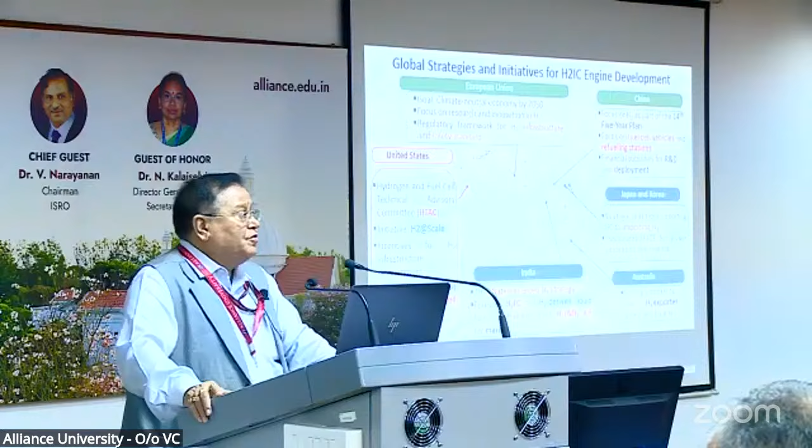Japan and Korea - Japan was the early mover in this area. They set up hydrogen infrastructure for distribution, transportation, and production at a very early stage, making a strategic shift from hydrocarbons, though they were importing hydrogen from elsewhere. Even today South Korea and Japan believe in that, encouraging hydrogen IC engines for power generation and marine applications. Australia depends on producing hydrogen and exporting it - that's the kind of system they have. So each country has followed its own method.

There is a history of hydrogen IC engines - we are not the first. I don't know how many of you know that Tangye Limited produced a town gas-based power generation system for marine, road, or rail applications in 1906. There was no activity between 1970 and 2000, but MAN made the hydrogen IC engine city bus in Berlin - 14 units between 2006 and 2009, with 4 units operated till 2015.

Between 2000 and 2012, there was significant development. BMW did a luxury sedan - BMW hydrogen IC engine, 100 units were manufactured. GM Opel also did that. Japan had fuel cell R&D between 2005 and 2010. Dutch projects were there in this period, and Ford also did work. So there was major work done during these 12 years.

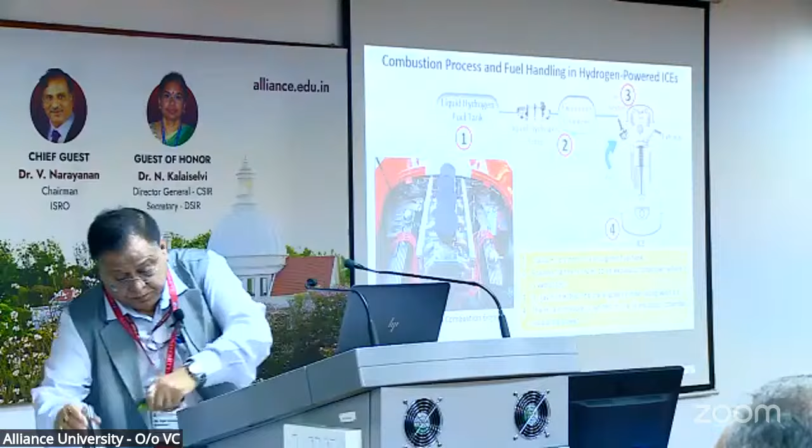The process is simple, all of you know what we're talking about. You can have the option of liquid hydrogen or gaseous hydrogen and directly inject it. Some people use a hydrogen injector with air and port direct injection. In this case, liquid hydrogen is stored in a cryogenic tank, a pump transfers hydrogen to an expansion chamber, hydrogen gas is injected into the engine cylinder along with air, and the hydrogen-air mixture in the combustion chamber does the job - this is a simple explanation.

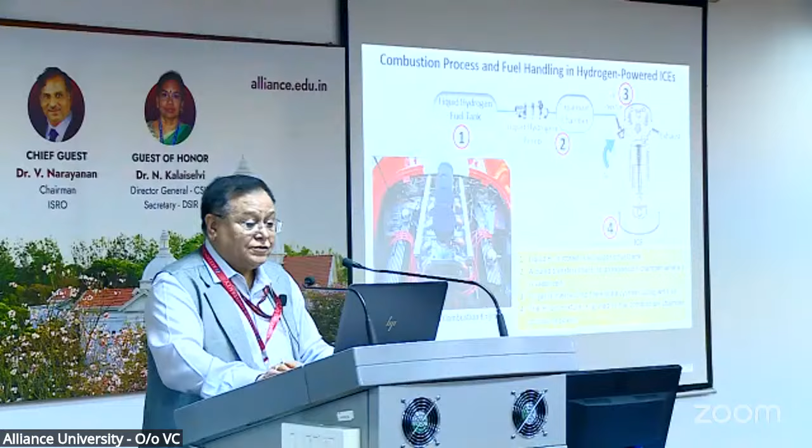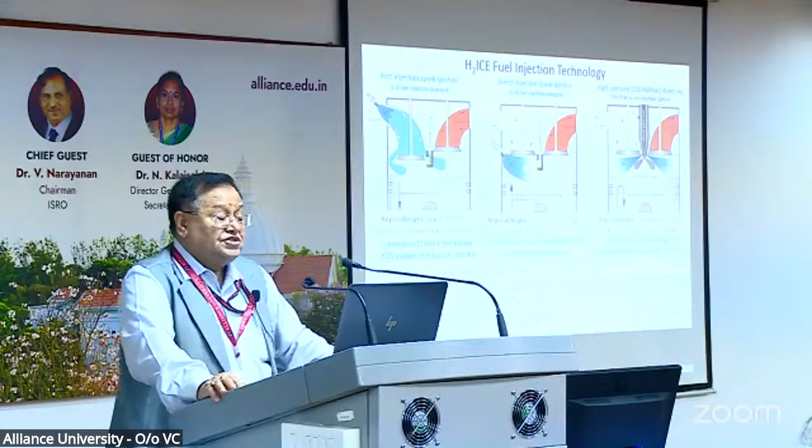Now, I think some experts are sitting here - Ravi is here, Chari is here, many who have worked in this area. There are hydrogen IC engine fuel injection technologies. First among them is port injection spark ignition, at about 3 to 10 bar injection pressure, where at the air intake you inject the hydrogen and use a spark plug. The rest remains the same. Key challenges are power density, abnormal combustion, and efficiency is an issue. This is called Generation 1.

These kinds of systems can come to market as retrofits by 2025. It is the simplest system - these are the plus points, a low cost fuel system. But then there are negatives for this, which is the risk of backfire into the intake manifold, high proneness to pre-ignition, and the transient response in this case is quite poor.

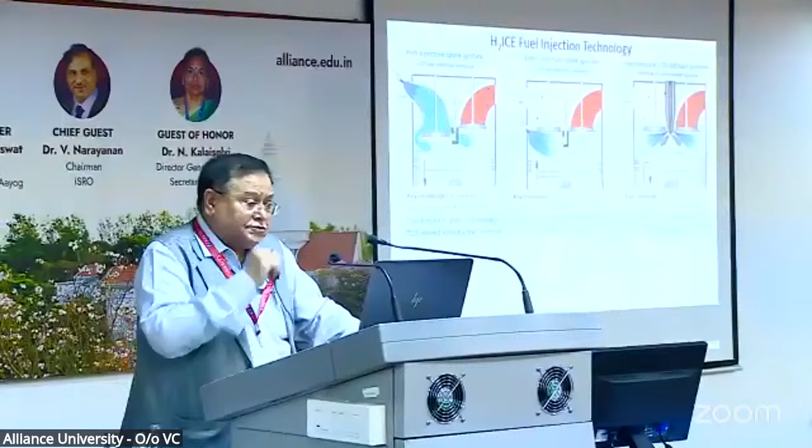The second one is a direct injection spark ignition, done at 10 to 50 bar, where intake is not touched, hydrogen is separately injected, and you use the spark plug. This is called Generation 2, and we expect this will come between 25 to 30. The advantage is that it can provide higher power density, improved efficiency and transient response.

Again, the problem here is an injection system with high durability is required. I am given to understand, I don't know, Ravi can explain to me, whether Bosch or Westport has developed a specific hydrogen injection system now, injectors they have done. Yeah, I think so. Somewhat higher NOx emissions is a problem here.

The high pressure, then the third generation which is coming, Generation 2 plus as we call it, is instead of 10 to 50 bars, you inject at 100 to 600 bar, and pilot fuel or pre-chamber ignition. So that is a kind of explanation. You have air intake, you have exhaust, and you have direct injection with a pilot fuel being done.

High pressure pump is required in this case. NOx is a problem. Fuel compression energy, Generation 2, so best efficiency you can get here. Power density is good, transient response is good, no backfire, reduced pre-ignition. But there is a residual pressure in the empty tank because the entire thing does not get exhausted. There is a lot of work being done to optimize this pressure because I have given you a range between 100 to 600. Obviously, there has to be some optimum pressure at which it should be done.

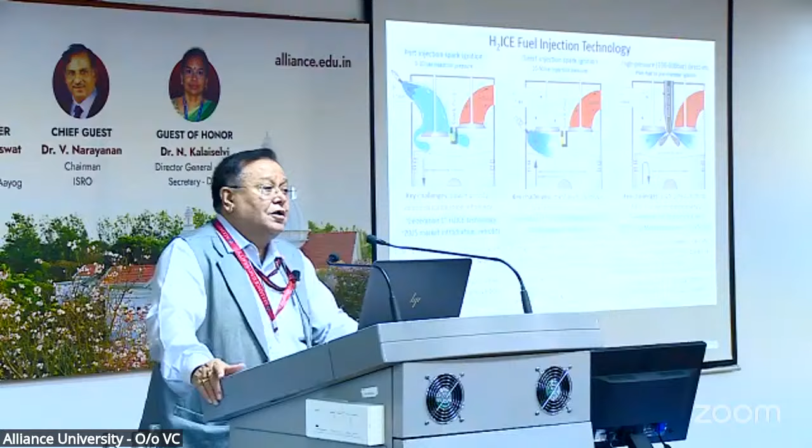So these are the three major efforts, other than the one work which is being done by Ravi on the opposing piston type of configuration, where two pistons are used and no conventional combustion chamber. The piston heads themselves form the combustion chamber in this case. You can have a single crankshaft, you can have a double crankshaft, and inject it at that point in time.

Generally, injection is done at the trailing part of the compression stroke so that you can reduce the NOx formation. The advantage is that it is going to give you much better thermal efficiency compared to the three we have talked about. I don't know whether there is a problem with respect to NOx in that case also, but certainly we have to take care of NOx by running it lean in some other manner.

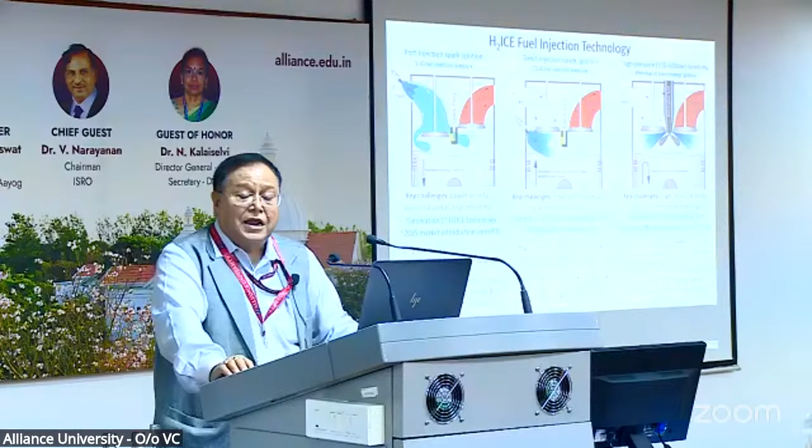So I think India should, as the work is going on in IISc, work on this opposing piston type of thing, and also people should go for direct injection at the earliest. Those industry partners who have already got the spark ignition engines running, I think they can try the port injection with the safety measures which are required for reducing the backfire.

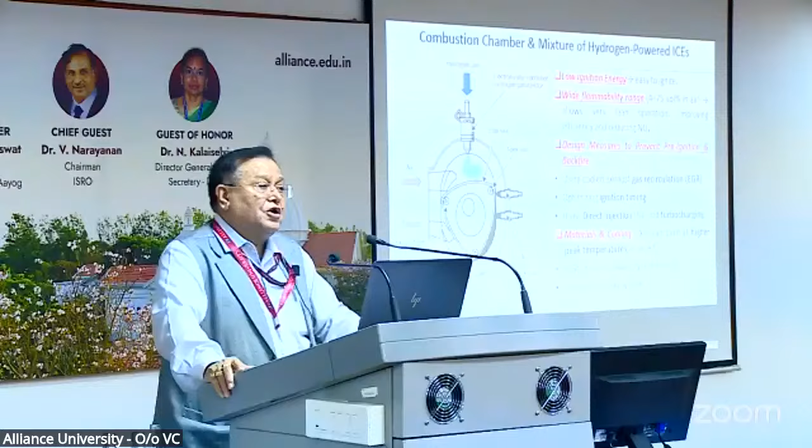Some of the design measures to prevent pre-ignition are using cooled exhaust gas recirculation, EGR. I was discussing with some people yesterday - how many of you have tried EGR as a process for preventing pre-ignition and backfire? We have to optimize the ignition timing because, as I was mentioning, a lot depends upon at what point in time you have injected in the compression stroke and at what point in time you have ignited.

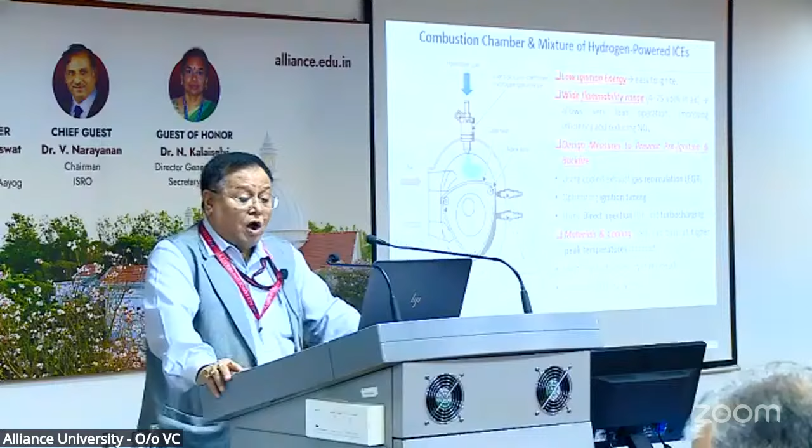You can have direct injection or turbocharging. Because of the high temperature, I think we need heat resistant valves and cylinder heads and also improved cooling systems. These are some of the requirements of the combustion chamber.

So what are the major challenges in hydrogen IC engine? Lean combustion and turbocharging for maximizing the thermal efficiency are the requirements. Chamber design has to be done for better cooling, and gas exchange optimization has to be done. Performance can be improved with the help of two-stage charging and engine scaling, upsizing to meet the power demands.

Fuel storage and supply - as discussed yesterday, fuel storage could be a safety problem, so one has to be very careful in terms of onboard hydrogen leakage detection and sealing. You should have sensors to ensure that there are no accidents.

High pressure hydrogen tank integration is required, because if you are going to use it in gaseous form, the ideal pressure is 350 to 700 bars, and hence you need very important sensing mechanisms and integration, because you can't inject at 700 bars. So you need pressure regulators, check valves, and the entire hydrogen injection system has to be designed accordingly.

One good thing that has happened is that component technology as far as hydrogen handling is concerned has developed worldwide very well now, because of rocketry. The joints, the sealing joints, the weldability, the valves, the regulators - these components are industrially available and certified for use with hydrogen. So that is an advantage for those who are designing hydrogen systems.

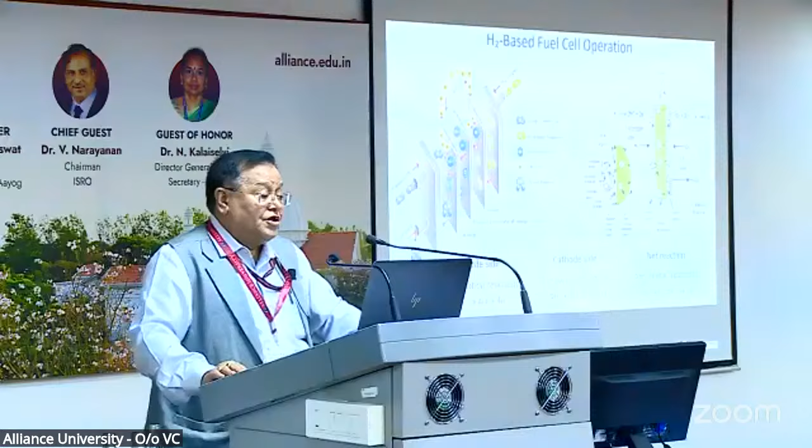This is for the students, how does a fuel cell operate. So you have a typical anode reaction, a cathode reaction, a net reaction between cathode and anode in a fuel cell. Oxygen is put inside, hydrogen is from the other side, and then you get water as an output and you get electricity.

I won't go into details of this. You can read it in your exam, in your classroom.

When you compare fuel cells with gasoline engines and electric motors, there is a clear advantage. The hydrogen fuel cell efficiency is in the region of 50 to 60%. There is a lot of effort being done by the fuel cell community to improve efficiency to as high as 68 to 70%. But only solid oxide fuel cells, which are still in the development stage, are likely to reach this kind of number. For PEM fuel cells, unless they work at high temperature, more than 120 degrees, you will not be able to achieve higher efficiencies. Gasoline engines are at 25-30%, but batteries are highly efficient, 85 to 90%.

Emissions are water vapor, and zero as far as battery is concerned. Refueling time is the most important criteria. For hydrogen, it's 3 to 5 minutes. Gasoline is about 5 minutes, and battery, as you all know, is a minimum of 30 minutes, could be as high as a few hours. Energy density is high and low. Infrastructure: hydrogen needs limited infrastructure. Gasoline, worldwide, we have huge infrastructure in the country, and battery infrastructure is also growing. As I mentioned yesterday, today we have almost 1400 battery charging stations set up across the country. Maintenance is low, only gasoline engines are high.

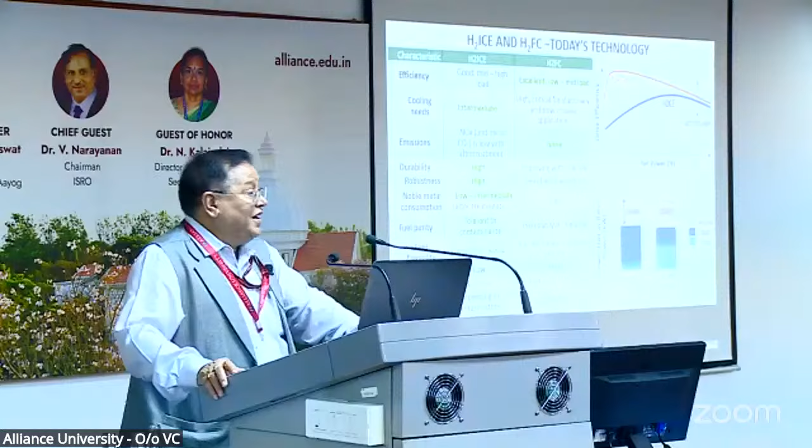Batteries are sensitive to vibration, but not hydrogen IC engines. The use of noble metal is the most important part I have been telling you about - critical minerals and materials in the case of battery and fuel cells is very high, whereas IC engines don't need all that. Fuel purity - IC engines are tolerant to any kind of hydrogen purity, whereas PEM fuel cells, if you have even 5 ppm of carbon monoxide or carbon dioxide, don't work. So you have a major problem. Upfront costs - IC engines are lower, fuel cells are very, very costly even today. Cold start has no issues for IC engines, but there are major problems of starting as far as batteries are concerned. Resale value - we don't know as far as batteries what that will be.

So these are some of the features I thought I should discuss with you and give you.

In terms of storage, there is storage system design and space efficiency. Physically, you can have compressed gas, cold or cryo-compressed, or liquid hydrogen. In terms of materials, as I was talking about yesterday - metal hydrides - you have absorbents like MOF type materials, liquid organic carriers like methylcyclohexane, interstitial hydrides, complex hydrides like sodium aluminum hydride, and chemical hydrogen carriers like ammonia and boron hydride. There's a lot of work going on with hydrides. The major problem, as I mentioned yesterday, is that the energy required for decomposing the hydride to generate hydrogen is generally higher than the energy required for its formation, and that's the reason research still hasn't solved this problem.

For high pressure storage, this is a typical configuration of a high pressure cylinder with an inner liner made of high density polymer, and the rest is carbon fiber composite. The major design problem in this case is the integration of metallic parts like the valves, shown in the blue line, and those things become a major problem.

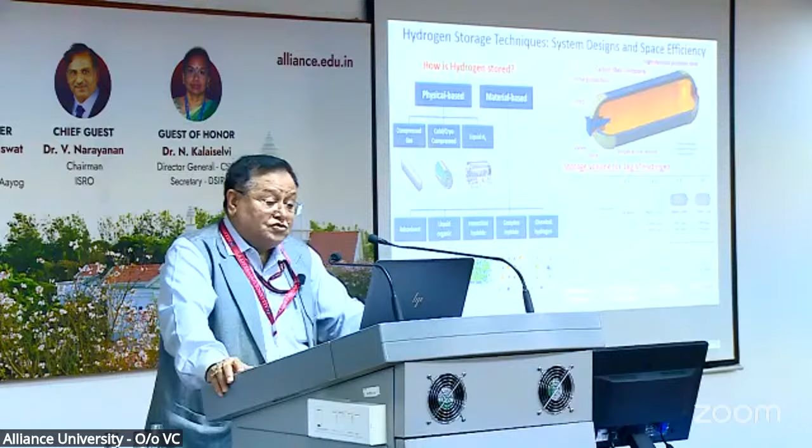You can have different sizes and capacities. If you take atmospheric storage, for the same amount, this is the size. If you take it in the form of ammonia, this is the size. If you take compressed gas, this is the size, and if you liquefy it, this is the size. This is the kind of difference you see when you make choices with respect to storage.

Present status of hydrogen storage infrastructure in India. Somebody asked me this question, I think some press person was asking. Tata Steel became the first Indian company to develop hydrogen transportation pipes, hydrogen compliant API X65 pipes, for 100% pure gaseous hydrogen at 100 bar.

Inox CVA flagged off the largest bulk liquid hydrogen storage tank ever made in India, with a capacity of 238 meter cube. Design has been done by South Korea. The cryogenic storage tank is built to European Union standards and requirements.

IITs and NITs are advancing metal hydride systems for efficient and safe hydrogen storage. For example, AB5 lanthanum, cerium and nickel, and AB2 titanium, zirconium and chromium alloys are being thought of.

There's a company called Vedasya - I think there are a lot of advertisements nowadays on TV for this company. They design and produce type 3 and type 4 composite overwrapped cylinders. So we don't have a problem. People should not think that India is not manufacturing the 700 bar cylinder. It is possible, but we need to set up the testing facility and infrastructure, and also PESO has to set the standards as far as regulations are concerned. Otherwise, such a high pressure system cannot be let out in the market without proper regulatory mechanisms.

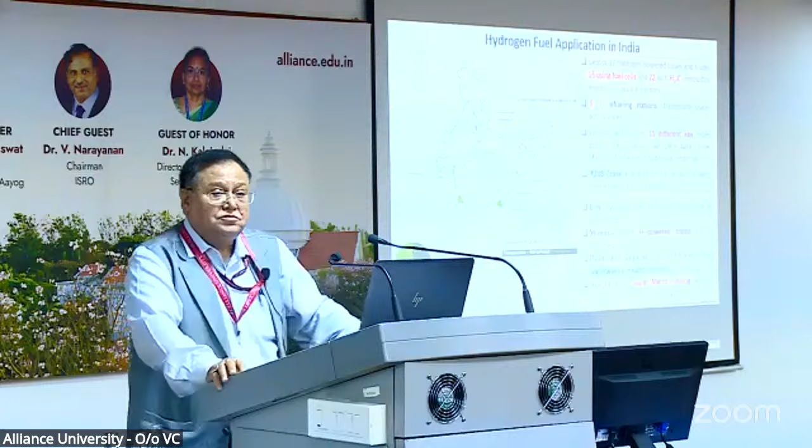Hydrogen fuel application in India - this is with respect to the National Hydrogen Mission. Deployed 37 hydrogen powered buses and trucks, 15 using fuel cells and 22 using hydrogen combustion.

9 hydrogen refueling stations have been placed. Vehicles will run on 10 different key routes like Delhi, Agra, Pune, Mumbai, Ahmedabad, Vadodara. 208 crore allocated for these pilot projects.

Somebody was mentioning yesterday that in Leh, we have hydrogen fuel cell buses operational at 11,500 feet. India's first hydrogen powered train is to be launched in 2026.

My friend Mahesh Rajpurohit is a railwayman. It is one opportunity where we can really remove all diesel engines and put hydrogen engines for running the railway system. Delhi, Gujarat and Kerala, they are all working in that direction.

The scaling of hydrogen mobility comes with a few challenges. One of the main problems is the infrastructure. As I mentioned, when Japan was introducing hydrogen, being a small country, it was not difficult for them to set up charging stations and things like that. We are trialing 9 hydrogen stations, trailing behind Japan, which has 166, and Germany with 105. But it requires a lot of investment.

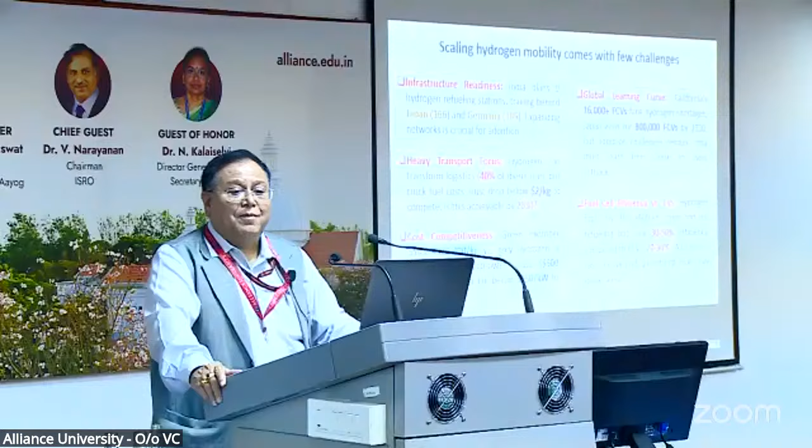Heavy transport focus - 40% of diesel buses can be replaced, but truck fuel costs must drop below, hydrogen should come to below $2 per kg to compete. Is this achievable by 2030? That is one of the major problems. If you are not depending upon green hydrogen for IC engine applications, then I think this is achievable. But if you are only saying you'll use only green hydrogen, then you have a serious problem with respect to timelines. Cost competitiveness, this number we discussed a number of times.

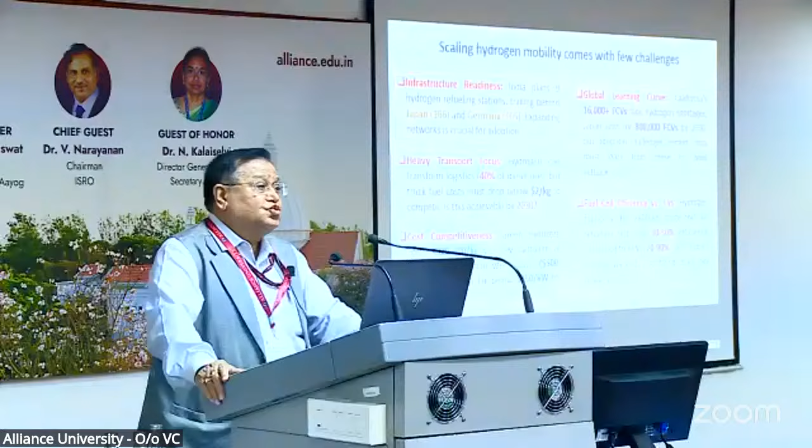Green hydrogen in terms of rupees is anything between 320 to 400 rupees a kg. Grey is 120 to 160 rupees a kg. Electrolyzers, I mentioned, anything between $500 to $1,200 per kilowatt. This has to come down to less than $250 per kilowatt for viability. There's a global learning curve.

California's 16,000 plus FCVs face hydrogen shortages, and Japan aims for 800,000 FCVs by 2030. But adoption challenges remain. India has to learn from these to avoid the setbacks. This is the major thing.

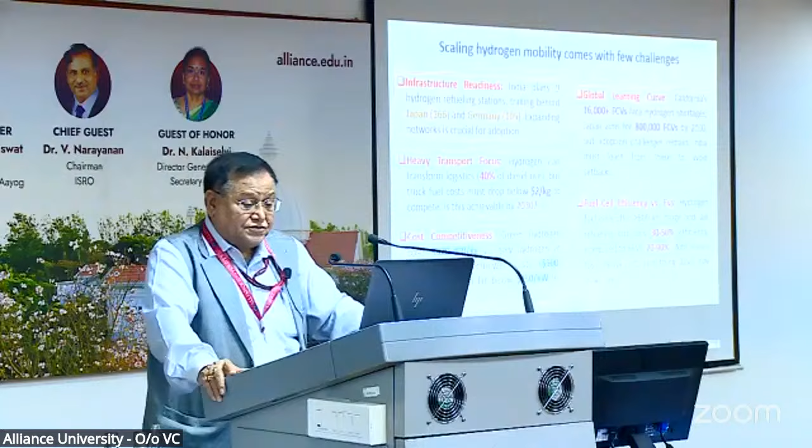Fuel cell efficiency, I mentioned to you - hydrogen fuel cells offer greater than 600 kilometer range and fast refueling, but with an efficiency of 30 to 50% compared to battery electric vehicles, which give you as high as 90% efficiency.

Integrate hydrogen fuel into power systems - that is, hydrogen as a long duration energy storage for balancing renewable power supply, especially in isolated grids or remote regions. Enable hydrogen-ready gas turbines and fuel cells to generate electricity during peak demand or renewable intermittency. In fact, hydrogen used in gas turbines also has to be looked at.

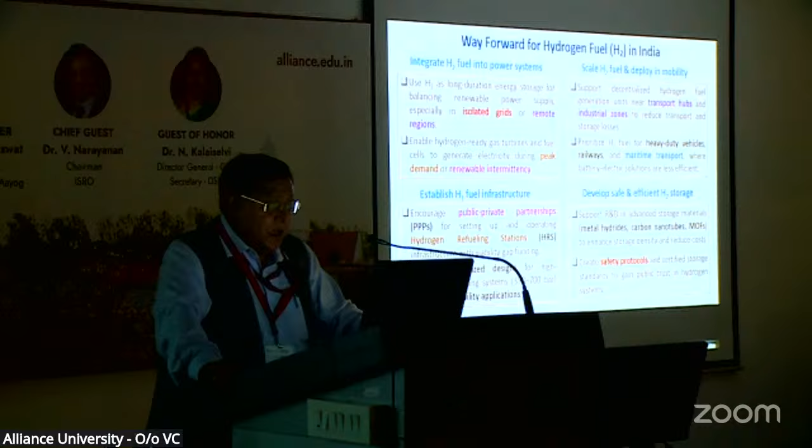Establish hydrogen fuel infrastructure - that is, encourage public-private partnership for setting up and operating hydrogen refueling stations, and create standard designs for high-pressure dispensing systems, because you have to compress on site. You can't be transporting 700 bars.

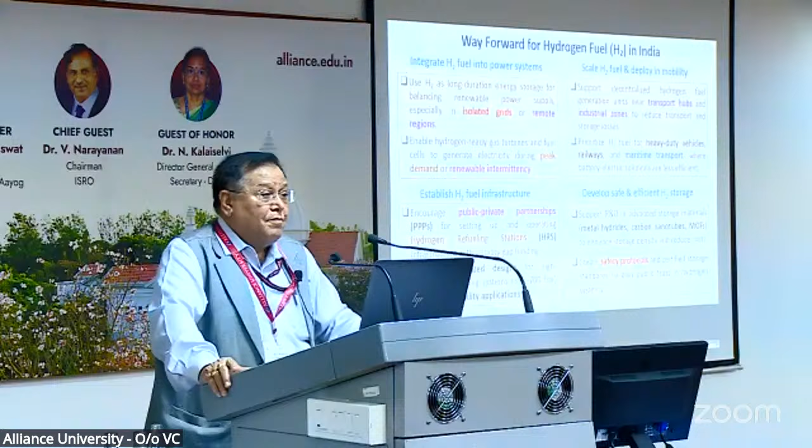You can't run heavy duty vehicles on batteries easily, so railways and heavy duty vehicles are ideal for hydrogen. Safety is very important, so for efficient hydrogen storage, support R&D in advanced storage materials like metal hydrides, carbon nanotubes and metal-organic frameworks, as I mentioned yesterday. Create safety protocols and certified storage standards to gain public trust in hydrogen.

So to conclude, what is the future outlook? Near-term decarbonization is feasible. Hydrogen IC engines are ideal for hard-to-electrify sectors like heavy trucks, rail and marine. Infrastructure compatibility leverages existing fueling stations and engine platforms. It is possible with lower development costs - we have seen the three different configurations I have given, not much cost. Faster market adoption, since familiar technology increases acceptance among OEMs and fleet operators.

If I tell any of the IC engine companies today, like Kirloskar, Ashok Leyland, Caterpillar or others, I think they will have no difficulty adopting hydrogen IC engines. Even the diesel generator sets running today, or those on the SI cycle, can all be readily converted into hydrogen gensets. So a smooth transition is possible.

Then comes fuel flexibility - you can operate on blends using transition fuels, like hydrogen and natural gas as I mentioned. There has to be a key R&D focus for this community. I think it is important to improve direct hydrogen injection systems - a lot of work is required in that area. Optimize the pressure of injection, valve timings and so on, and reduce NOx emissions without compromising efficiency. We can go leaner and leaner, but you still have an efficiency problem.

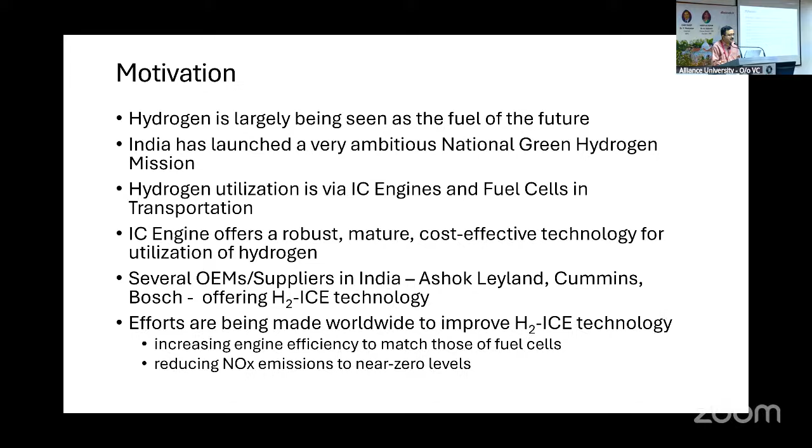I'm going to skip some of the initial slides, since this has been covered extensively yesterday and today. Dr. Saraswat gave a very long and detailed talk about the hydrogen scenario in India, which was very inspiring for many of us. So I'll skip the slides on hydrogen as an IC engine fuel, and some of the challenges in IC engines that were also spoken about yesterday by people from industry and academia.

So pre-ignition being a problem, crankcase ventilation. But I want to highlight this point, which I think Dr. Saraswat also made, about lean combustion with higher compression ratios giving you the best efficiency. This is something I'll talk a little bit more about, along with the associated problems with that. Again, I'm going to skip some of this in the interest of time.

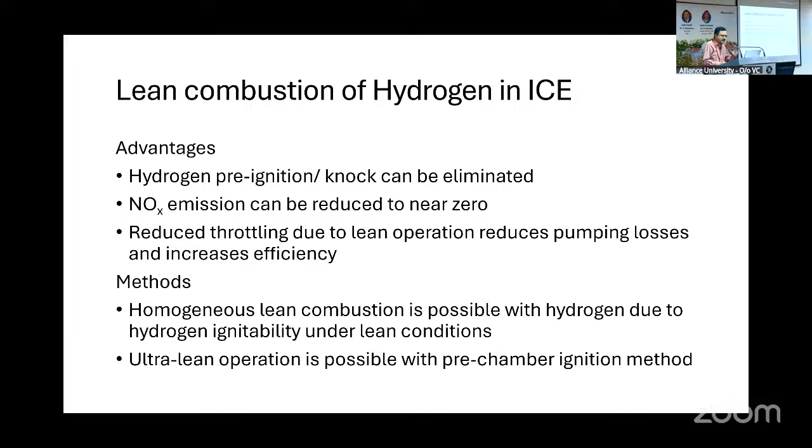Lean combustion has a lot of advantages. You can eliminate pre-ignition or knock. The problem of high NOx emissions that Dr. Saraswat mentioned can be mitigated to a large extent. From an engine point of view, you can do reduced throttling because it reduces pumping losses. There are quite a few technologies available for getting to lean combustion. I'm going to focus on one such technology, and in the second half of my talk, I'll discuss what we've been doing on the opposed piston engine. This is the broad outline of today's presentation.

Now, pre-chamber combustion is something very interesting. Many of you who have been traditional IC engine students know that pre-chambers were used in old diesel engines, indirect injection diesel engines.

This pre-chamber concept is coming back in a big way for hydrogen combustion, and I'll tell you why. There are two broad kinds of pre-chambers, active and passive, and it basically allows you to have stratified combustion in addition to homogeneous combustion.

Pre-chamber combustion is being applied to not just hydrogen, but multiple fuels like gasoline, CNG, ethanol, and so on. It allows lean combustion, which improves thermal efficiency, and lambda values as lean as 5 are achievable. When I say lambda of 5, that means the equivalence ratio is as low as around 0.2, extremely lean or ultra lean. That is also possible with pre-chamber combustion.

So here is a deep dive into what is pre-chamber combustion. Essentially, you have a small chamber into which you either actively inject fuel and allow some combustion to happen, and those hot combustion gases then come out into the main chamber. So you can have a very lean mixture in the main chamber, and this rich combustion in the pre-chamber, and the turbulent jets which are burning and entering the main chamber allow it to ignite. Essentially, that's what it is.

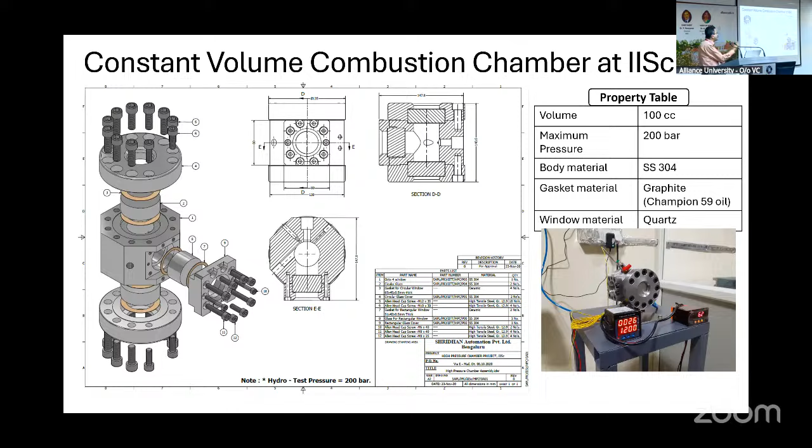Here we have been trying a lot of research on ignition systems. The time is very limited, so I'm only going to give you a flavor. We have been looking at thermal plasma ignition systems and also non-thermal plasma, which is very interesting. I won't be talking about non-thermal plasma in this talk since it would require a lot more time, but these nanosecond pulse discharges have also given us some very encouraging results.

This is like basically high-speed shadowgraphy, as we call it. This is just a picture of the setup. You can see the constant volume chamber here, the high-speed camera, and all the optics for the backlighting. I'm going to show you some sample results in a minute.

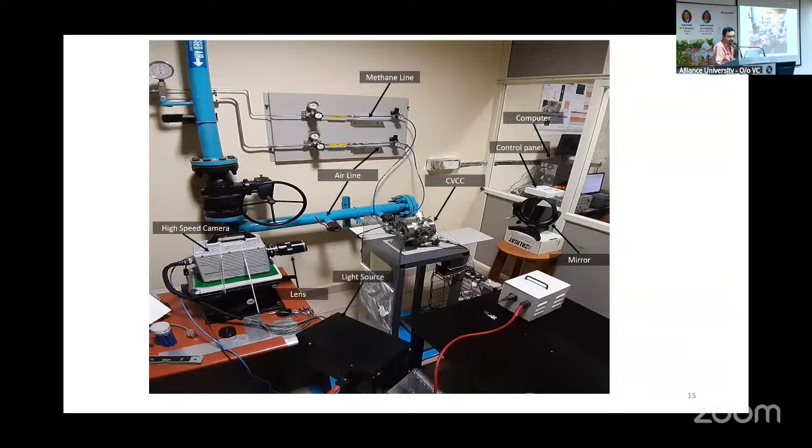What I'm trying to say is that these kinds of experiments give us a lot of insight into how the flame is actually going to behave inside the combustion chamber. Of course, there's a disclaimer: this is a nice laminar flame, whereas in a real IC engine you have a highly turbulent mixture which tends to accelerate. But this still gives you a very good idea of what to expect when you bring in hydrogen as an IC engine fuel.

Now, I was talking about pre-chambers. A passive pre-chamber is when the mixture inside the chamber goes back during compression, the same mixture ignites, and then comes out as a burning jet. This is an active chamber where you're actually injecting some fuel into the pre-chamber, so you have a rich mixture which burns and then the jets come out. I'll show you a video of this very shortly.

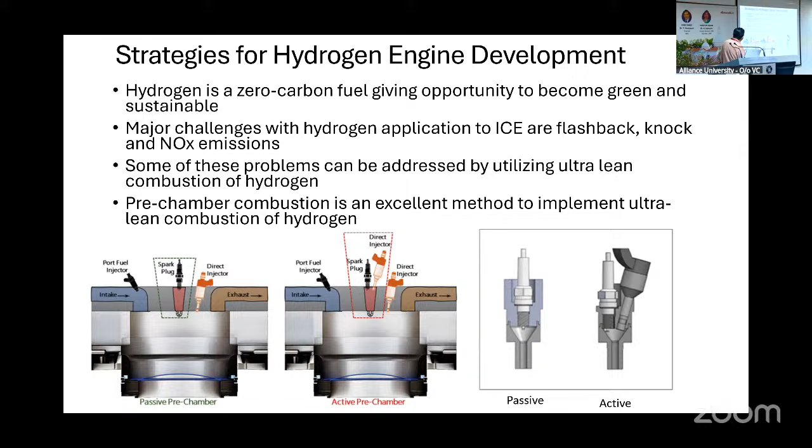We have been looking at this pre-chamber technology very actively, both from a fundamental constant volume chamber point of view and also in the IC engine. I'll skip the details, but we have started to look at hydrogen methane blends. We believe that pre-chamber is an excellent method to implement ultra lean combustion of hydrogen. Of course, there will be issues like NOx, I'll talk about that a little later.

This of course is with methane, but with hydrogen you expect maybe something very different. We have not yet done experiments, in fact some of the experiments with hydrogen are ongoing as we speak. But you can get a lot of data from this. We have looked at different kinds of spark plugs, we are looking at passive pre-chambers, just to give you a flavor of what we are doing.

We have created a small engine test facility at IISc. Of course, this took a lot of effort, funds and resources, but I'll just show you a glimpse. This is a completely remotely operated test cell. We have the engine and the dynamometer inside, and the operators actually sit in a different building, so in terms of safety we have ensured that this is implemented.

Inside we have a lot of other features. For example, we have all hydrogen rated pipelines. Dr. Saraswat was talking about some of the standards of hydrogen, so we have implemented all of those. There's automatic shutoff, so if it detects hydrogen leakage, there's an automatic shutoff of all the valves from the hydrogen bay. There is active fire suppression, so if a sensor detects hydrogen, it immediately injects a gas called HFC, one of the HFC gases, to suppress fire. So this facility is now rated for hydrogen, 100% hydrogen engine tests.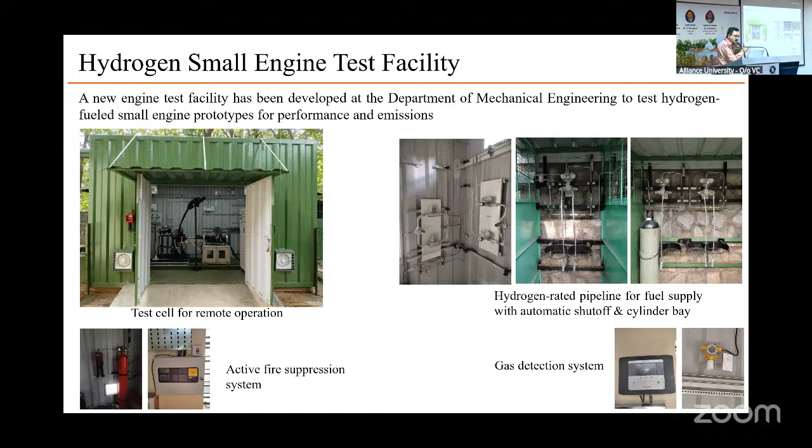We have an office of laboratory safety on campus, and unless they come and certify, we are not allowed to do experiments. So this office has actually certified this facility for hydrogen usage for small engines.

I have about 7 or 8 minutes left, so I'm going to quickly talk about the opposed piston engine, about which Dr. Saraswat also made a mention.

I borrowed a slide from this startup called Achates Power. This is a very successful startup in the US. They've been around for 20 years. They've built this opposed piston engine. You can see that these two pistons are moving against each other.

It's a two-stroke concept. You can see the ports where the fresh gases come in and the exhaust goes out, and the two pistons are moving against each other. So there's no question of a cylinder head, and there are no exhaust or intake valves. So the mechanical complexity comes down, and they have actually built a diesel engine with this technology.

In this case, you can see it's a 3-cylinder engine. One of the diesel engines that Achates has developed has actually been measured, and it is now powering a truck in the US, delivering 50% brake thermal efficiency. Now, all of you know that 50% is unimaginably high for an IC engine.

If you remember the plot Dr. Saraswat showed about how fuel cell efficiencies come down with power while IC engine efficiencies increase, and both of them are meeting somewhere—remember that plot about fuel cell versus IC engine efficiency, how they are meeting—this technology promises to bridge that gap.

Of course, this 50% is with diesel. There's a lot of research going on around the world on hydrogen opposed piston engines. And if you really get 50% with hydrogen, that's a jackpot, because then it can easily beat a fuel cell. So I'm going to skip some slides.

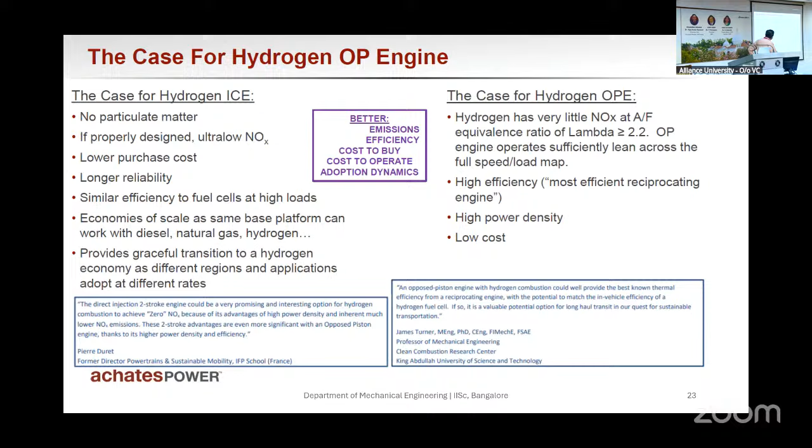Regarding the design development of this engine at IISc, conceptually it's a simple 2-stroke engine with uniflow scavenging—meaning fresh charge comes in and goes out from the other side. We did a lot of CFD work to optimize the scavenging port design. In the interest of time, I'm going to skip all of this. We optimized the port angles and port areas—this may not be of much interest.

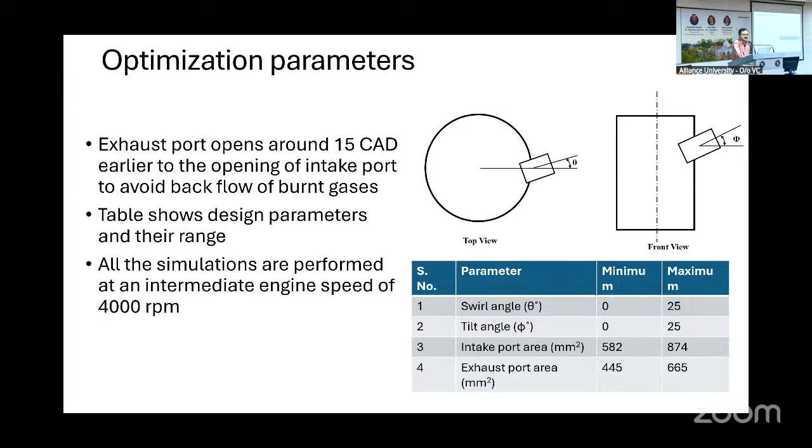I'll just show you a sample. We did a lot of optimization and came up with a lot of different angles. Essentially, everything was based on very elaborate CFD simulations. We used the DOE approach, so there were literally more than 50 to 60 simulations done.

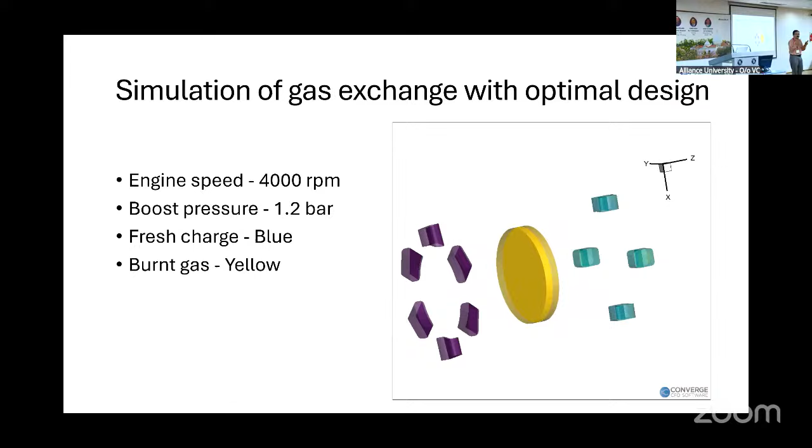Now, if you remember from Dr. Saraswat's talk, he mentioned NOx being a big challenge. In 2-stroke engines, the beauty is you can manipulate your scavenging process to ensure there's some leftover gas from the previous cycle—it's like internal EGR. I think all of you know what EGR is, exhaust gas recirculation. In a 4-stroke engine, you have to purposely bring exhaust gas back into the cylinder.

In a 2-stroke engine, you don't have to do anything extra. You just manipulate your port in such a way that some of the gas stays inside from the previous cycle. So it's automatically doing EGR for you, which lowers temperatures and lowers NOx. That is the beauty of the 2-stroke concept for hydrogen engines.

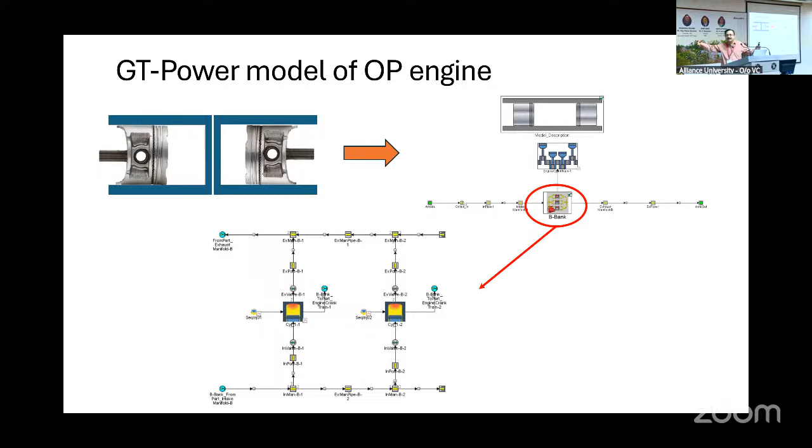We have built a lot of CFD models and also engine models using a software called GT Power, which enables you to build an entire engine model. This kind of model helps us optimize the stroke to bore ratio, which is very important for many things. We have done all these simulations and arrived at the design.

The conceptual design is basically meant to speed up our development. We have borrowed commercially available 2-wheeler engine parts, including pistons and other components, and we are trying to build a prototype using some of these commercially available parts.

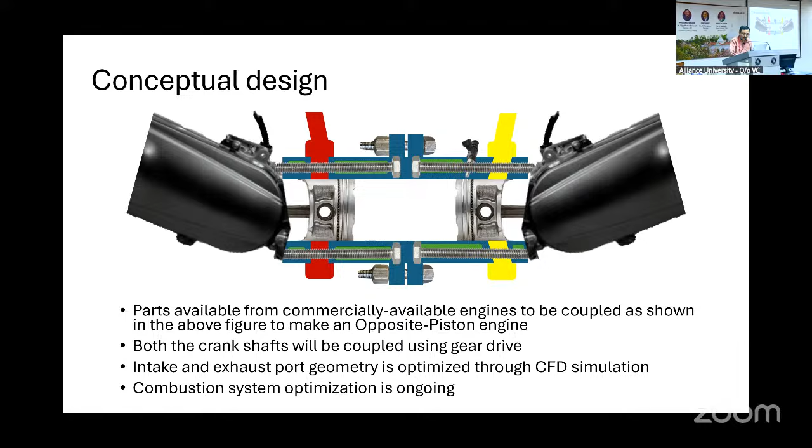Some of the work is still ongoing, like combustion system process optimization. We are planning to use low pressure hydrogen fuel injectors for this, specifically port fuel injectors. They aren't shown clearly in this diagram, but the fuel injector is shown right here. We use low pressure injectors to inject hydrogen fuel into the cylinder.

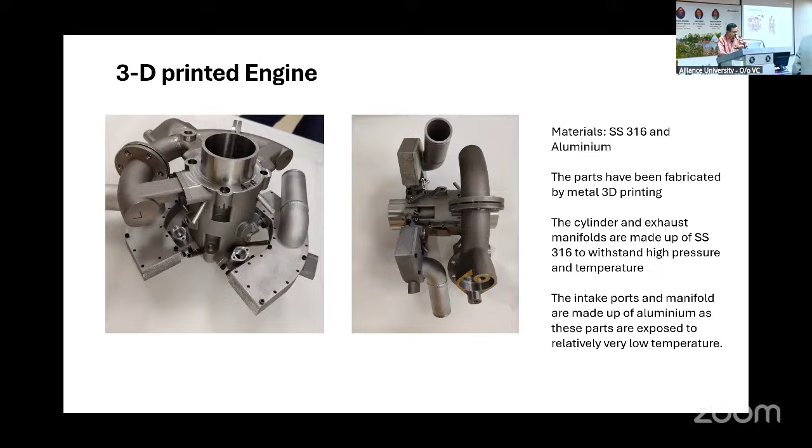I think I'm exactly in time, 11:20, so I will stop here. Thank you very much. I don't know if there is time for questions, but if there is, we can take one. Thank you.

What is this GT Power model? GT Power is basically an engine simulation software where you can model the entire engine. The cylinder is basically modeled as 0D. It is designed particularly for IC engines, not gas turbines. The cylinder is modeled as 0D and the manifolds are 1D intake, so it's a combination of 0D and 1D. That's why it can run very quickly - the simulation can be run very quickly.

Yeah, okay, yeah, thank you. Thank you all.

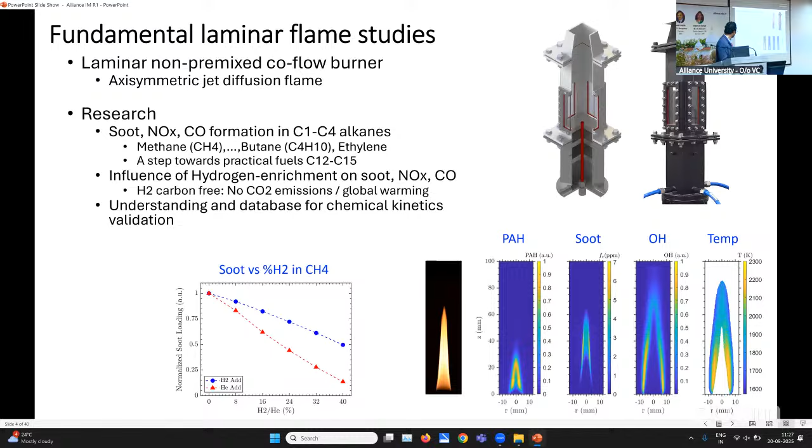We also look at not only laminar flames but turbulent flames. This is a rich quench-lean gas turbine combustor, one sector of the combustor, and the typical flame looks like that — a very sooty flame with ethylene fuel. There are other holes for the second stage of combustion, so you do rich combustion here and lean combustion there. This transition is for low NOx, but the rich case will generate soot, and when you put on the dilution air, that soot gets oxidized. On the left side you see soot concentration information in ppb.

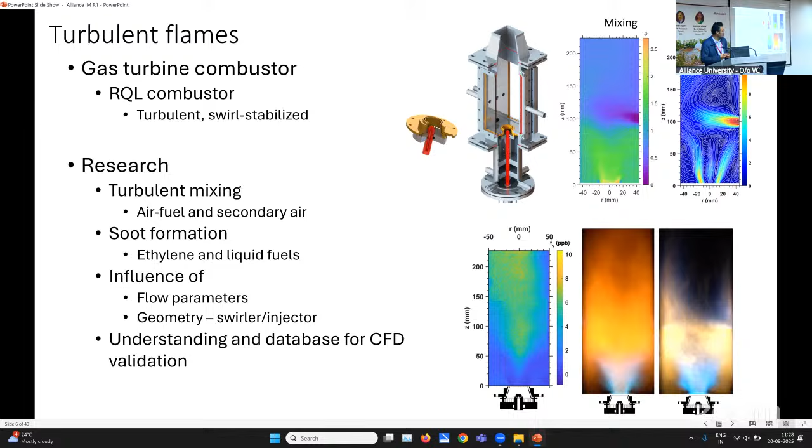We also looked at cold flow air-fuel mixing. This axis represents equivalence ratio or fuel concentration, so you have a rich mixture here, then injection of pure air, mixing occurs, and you get a lean mixture - that's the transition. On the right you see a velocity field obtained using a technique called particle image velocimetry. That's an example of these capabilities.

Now why soot emissions are not good: the previous talks spoke of particulate emission and NOx emission. Not only for IC engines, but for aircraft engines, soot emissions at particular altitude act as crystallization sites, leading to formation of contrails that you can see in the sky. These are condensation sites and formation of crystals, liquid and then ice crystals, due to colder ambience, and this mainly traps heat with H2O. This leads to global warming, so that's why these emissions are controlled. If you want to sell your engine, it needs to be under certain emission control.

That is for a jet engine, and the fuel you use is C12 to C15, a carbon chain typically with alkanes and to some extent aromatics. This is a very complicated fuel to handle, and academically we are somewhere over here — we know the chemistry of C2H4 ethylene very well, and maybe these other fuels are getting developed, but we are a bit far from understanding chemistry for that part. So our approach is to start with very simple fuel, generate flames, provide the database, and hope that eventually we'll bridge that gap as well.

So in chemical kinetics, hydrogen-oxygen chemistry is very easy because the set of reactions is small. The next level is CO chemistry, again with a small set of reactions, then methane chemistry, and the carbon number progressively increases. So chemistry for higher hydrocarbons builds on the simple chemistry of H2-O2 and CO and so on.

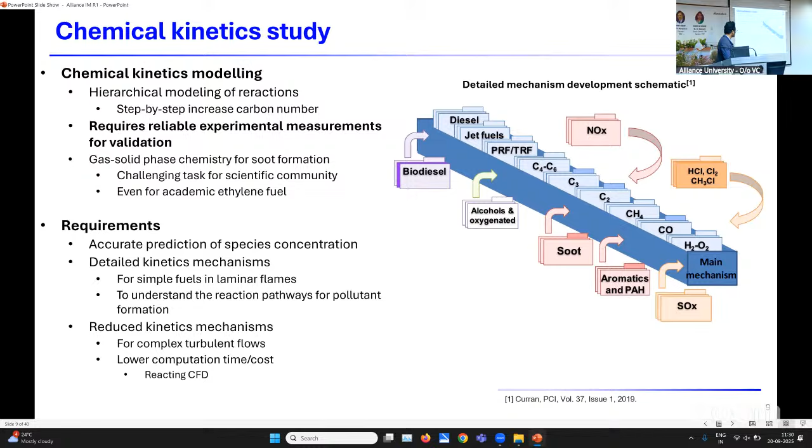So that's a laminar flame, burner stabilized over here. That's a one-dimensional flame, easier to simulate, and you see soot forming. There's a flame somewhere here, and the top plate stabilizes the flame. You see soot forming over there, and this luminosity you see, just like an electric bulb, is incandescence coming from the soot.

Now along this side, what's happening is you have pyrolysis of the incoming fuel-rich mixture, formation of polycyclic aromatic rings, and eventually that aromatic size grows and you have inception of the first soot particle. The particle also grows along this direction, and the growth can be described by the C-to-H ratio of that particle. So the incipient particle will have less carbon and more hydrogen, and eventually carbon starts to dominate, and it can go to pure carbon.

So that's the whole idea over here, and we do 1D flames and take measurements. Now that's the burner details. The burner looks like that.

In the measurement technique, we put a laser sheet of 1064 nanometer infrared wavelength, and since this is a black particle, it absorbs that radiation and gets heated up beyond the flame temperature. So it has its own incandescence beyond this natural luminosity, and you get a signal out of that. That signal is proportional to soot volume fraction. That's the entire principle of the measurement.

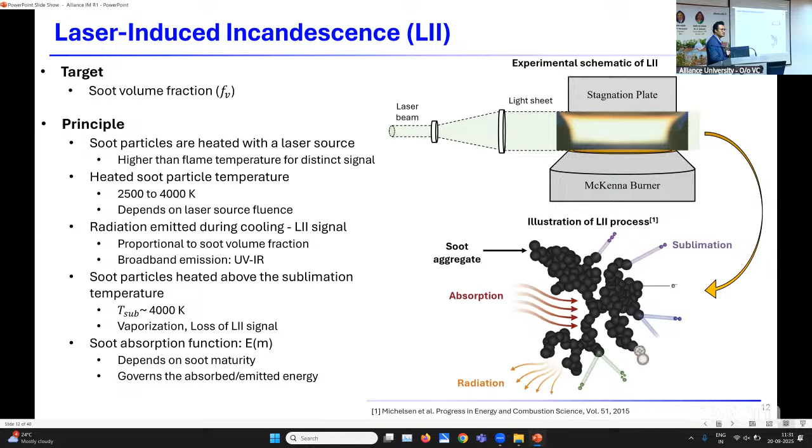This curve shows the incandescence signal as a function of laser energy. You suddenly start to have a signal coming from soot radiation, soot incandescence, and then suddenly you have a plateau. This plateau occurs because the soot particles sublimate due to absorption of too much energy as a function of laser energy. That's a typical trend, and people do experiments around that point so there is no sensitivity to laser energy variation.

So you need to calibrate that signal. The way you calibrate is basically similar to how you don't see well when there's fog or rain, because light gets absorbed or scattered. The same principle applies here. If you pass a laser beam through the soot, you'll have less intensity due to absorption or scattering by these particles. By looking at a certain constant, you can get the soot concentration. That's how we calibrate our signal.

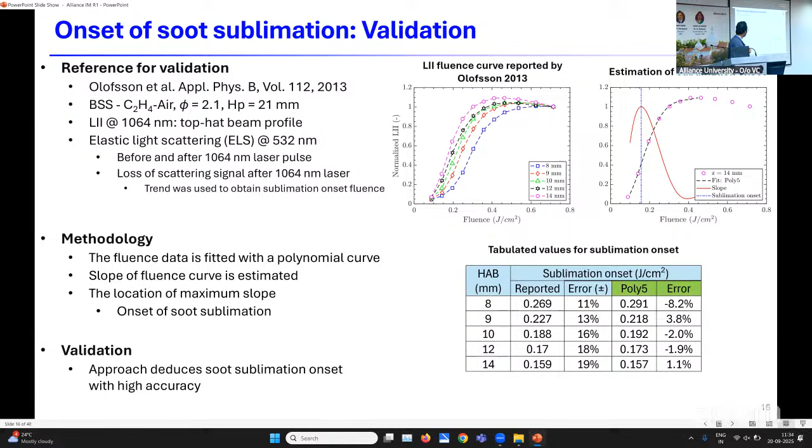That's our approach. By doing that, we come up with this curve. We say that the absorption optical property of soot changes in this manner, the bottom curve, and the top curve shows the temperature variation along the height of that particular burner.

This curve signifies the importance of doing that correction. The first line is uncorrected, the dotted line is corrected. If you don't correct, you have a slight error and the bias is very high. For example, at a particular height, say 6 mm above the burner, the bias could be about 100%. So this is the kind of accurate result you can get.

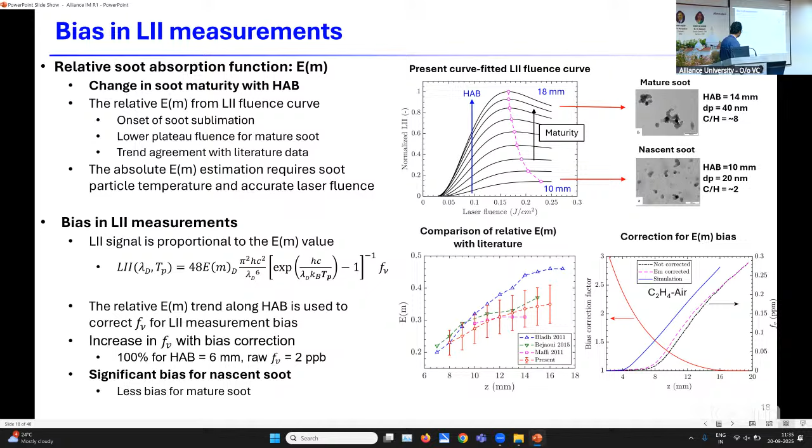This picture shows, as a function of fuel, starting from methane then propane, butane and ethylene, how the total soot loading changes as a function of fuel. This is an expected curve, but we get a quantitative number out of it. Now we can give this to chemical kinetics people doing modeling. They have very accurate data for basic fuels, so the basic chemistry isn't incorrect, and they can build upon that chemistry for practical fuels, C12 onwards. That's the intention of doing this experiment.

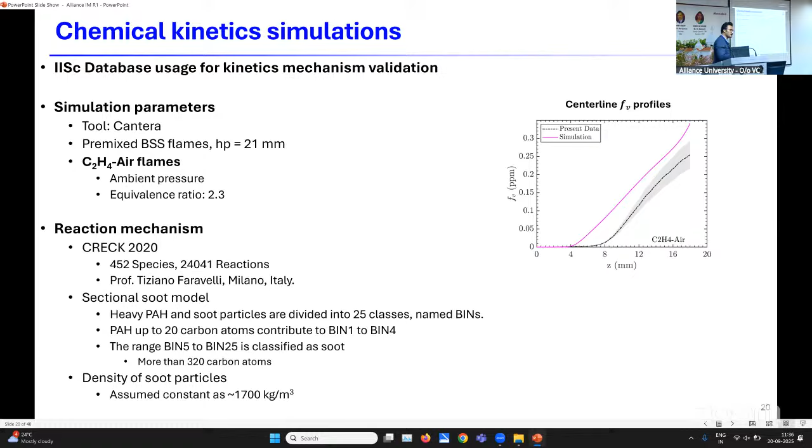Now we tested the simulation ourselves, doing a 1D simulation. This is chemistry simulation, a bit involved. For that we use a certain mechanism developed by Italian groups. This line shows the measurement, and the magenta line shows simulation. What you see in simulation is that soot onset occurs way ahead. From this we can tell there is a need to revise the soot inception rates, because it doesn't match experiments, where soot onset starts somewhere later. So there's some additional work needed on the reaction modeling side.

Now that was with 0% hydrogen. If you add hydrogen, here's the picture. We know the inception rate has some offset into it, so we move that inception simulation line and see if the growth rate matches. Growth rate comes out reasonably, but it's still on the lower side. So even accounting for this shift, both inception rate and growth rate chemistry need revision. In the case of hydrogen, results don't match at all, the growth rate is just too high for the simulation. This shows the significance of doing a simple 1D flames measurement to see the impact of hydrogen.

It just doesn't work because the chemistry has been tuned to methane or ethylene-air kind of configuration without any addition of hydrogen. So we tried this with different fuels. In this case it's ethylene plus oxygen, with increased content of oxygen. Does it match with increased content of hydrogen? Sometimes it does match, sometimes it doesn't, so it's not that consistent. The fuel here is ethylene and O2.

Now we started to go from C1, methane, to butane. You see results from methane and ethane here. Methane's growth rate is reasonably predicted. All those curves are shifted, by the way, you see a shift here of 4 millimeters. The inception rate never matches, and those numbers can be used by chemical kinetics people to tune their kinetics.

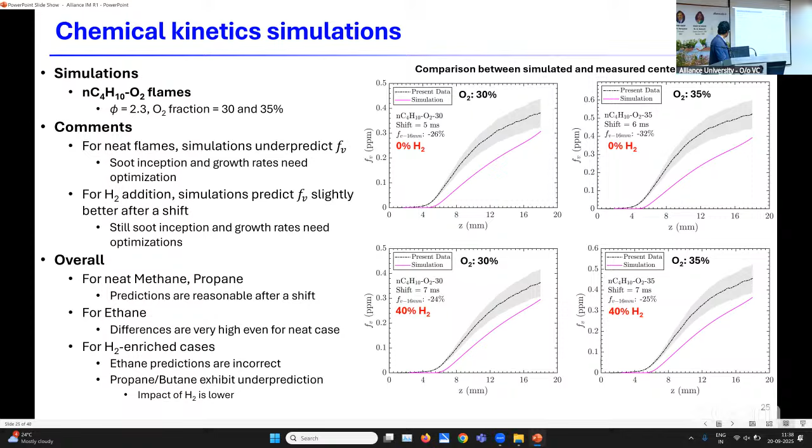We have a lot of results for other flames like propane, and we always give the numbers for inception rate and growth rates. This data eventually we will give to the international sooting flame database. Here are the results for butane. Now we can go directly to the conclusion slide.

So the conclusion of this work is there is something called the International Sooting Flame Community, which collects databases from all over the world, from Germany, Australia, KAUST in Saudi Arabia, places like that. They will use this data, and there is a simulation community as well. All this is for laminar academic flames, but once you tune the model, you can take it to any practical configuration. After you reduce that chemistry to have a suitable computational arrangement to run on available resources, you can eventually transition to gas turbine combustion and soot prediction there. That's the whole idea of doing this work.

The main idea is that with addition of hydrogen, you need to change the kinetics, and if you use existing chemical kinetics, you're not going to get any better prediction in IC engines or gas turbines. So if this is refined, those predictions will improve.

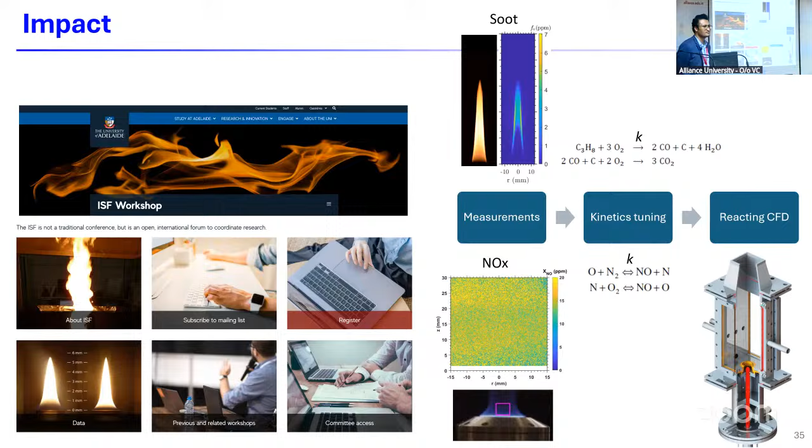No? Thank you, Professor. Thank you.

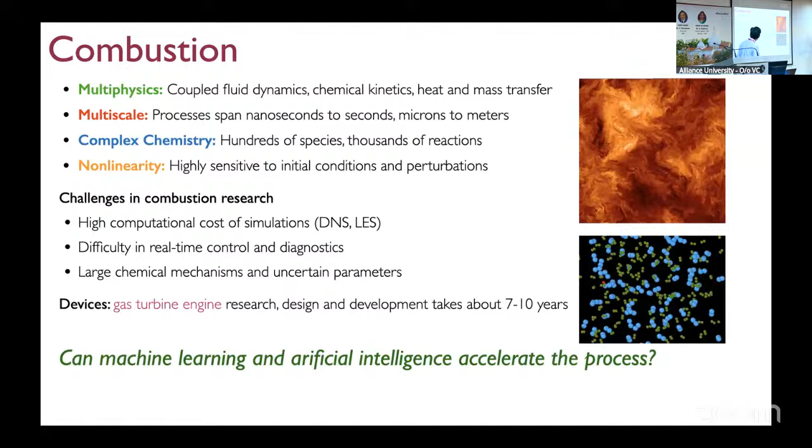I'm being very generous here, but that's how the time scale is. So now the question is, can machine learning be used in accelerating this cycle? That's the question I want to answer. In this talk, I will not go into detailed concepts, but give you an overview of several examples of how machine learning is being used in combustion. If you're interested, you can talk to me after this, or we can chat by email.

A quick primer on machine learning. The entire machine learning framework is divided into 3 areas. The first is supervised learning, where you have data that someone labels between inputs and outputs. This divides into classification and regression algorithms. Classification is mainly whether things are working fine or not, yes or no kind of answers, while regression is where I have these conditions and I want the best parameter, so you fit a regression line and get the outputs.

The second is where I have data, but no labeled input-output pairs. Here we want to use clustering algorithms and look at unsupervised techniques. And finally, if you want to do any control process, there's something called reinforcement learning, which uses a reward mechanism to optimize its predictions and control algorithm.

All these things are further divided into 2 areas. One is statistical learning, the traditional statistical methods adapted to large data. Then you have deep learning, which starts from ANNs all the way to ChatGPT, which we're all familiar with. Recent advances include foundational models, which is what people are looking at. Finally, you have generative models - what I learn from data is the underlying distribution. Now I've learned the distribution, I can sample data at any condition or combination of conditions, and predict things. That's what generative models are all about. And finally, the reinforcement learning and new architectures.

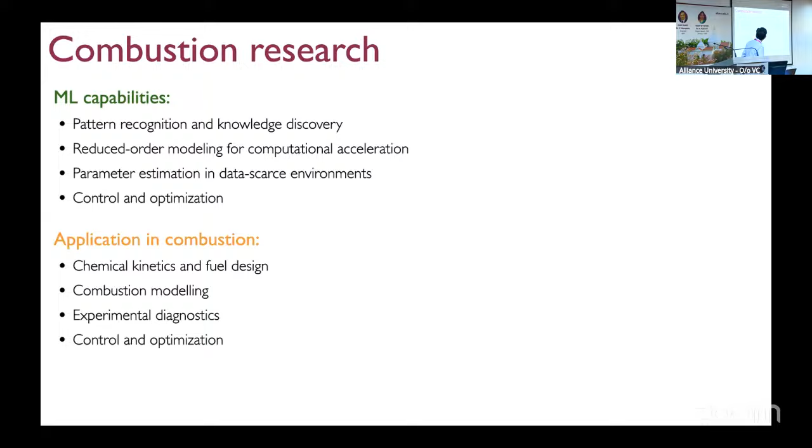In terms of combustion applications, these can be used in 4 different ways broadly. First is chemical kinetics and fuel design. For example, earlier many speakers talked about blending hydrogen with methane or blending hydrogen with something else - what is the right blending proportion? Those kinds of things can be done in this context. And then combustion modeling and experimental diagnostics and so on.

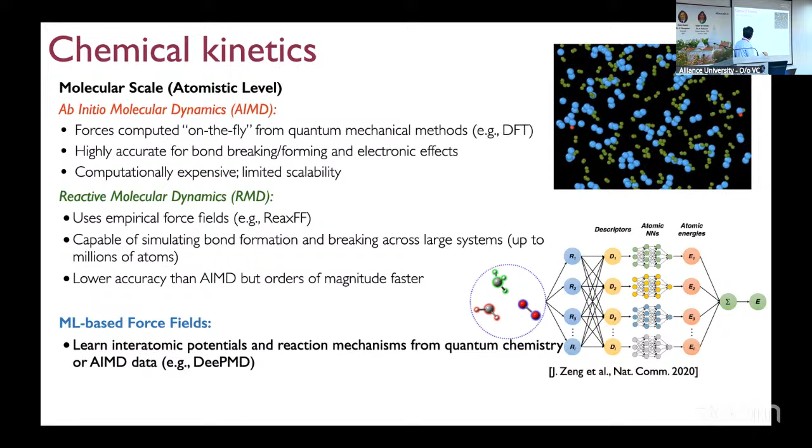At a kinetic scale, in my lab we are looking at molecular dynamics, where we're developing a new paradigm on improving the accuracy of MD to predict the entire chemical kinetics in a single go. In this process, machine learning is being used to develop ab initio MD scale accuracy with reactive molecular dynamics, or force field based dynamics, which is much less expensive.

There has been a paper in Nature Communications where people are able to show the accuracy of machine learning potentials with a great amount of fidelity, and the cost of these things is realizable for even complex hydrocarbons.

The next one is fuel design. This is work from KAUST in Saudi Arabia. What they have done is taken a database of measurements from experiments, and in this process developed a generative model that trains on this data.

So now it has two things: the chemical inputs you give in, for example the composition of your fuel, then a mixing operator which determines the mixing fraction between the different components, and finally it predicts some properties based on the mixing operator, going towards engine scale predictors. If I want to optimize for soot index, what is the right mixing operator and the right mixing fraction? These are the kinds of optimizations envisioned through machine learning processes.

Another example, done in my own lab: we are looking at Ansaldo Energia's reheat burner. This is a two-stage combustion system where the first stage is aerodynamically stabilized like any other burner. The second stage has products from the first stage, so the reactants are at vitiated conditions, and this flame can be stabilized in a spontaneous ignition mode. The overall characteristics of this combustor are governed predominantly by the second stage.

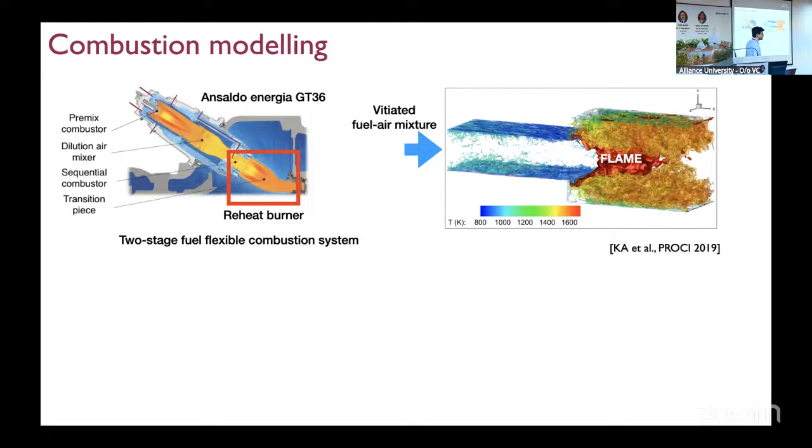Just to give you what this simulation costs: it's fully direct numerical simulation, solving for the 5 conservation equations plus the 9 chemical species for the hydrogen mechanism. We use about 2 billion grid points and 1 million time steps. The CPU cost is about 20 million CPU hours. These are really expensive simulations.

But when I do such a simulation, what do we get out of it? Am I doing something different? And is it going to impact my engine design? That is a question that we want to answer.

The initial engine or concept was envisioned to stabilize the flame mainly in the spontaneous ignition mode, shown in green here. But what you actually find is the reactants in the near wall region are cooled because of wall cooling, and their ignition delay time increases significantly. Now the flame here is stabilized by flame propagation mode, and we were able to quantify the amount of fuel consumed in each of these modes.

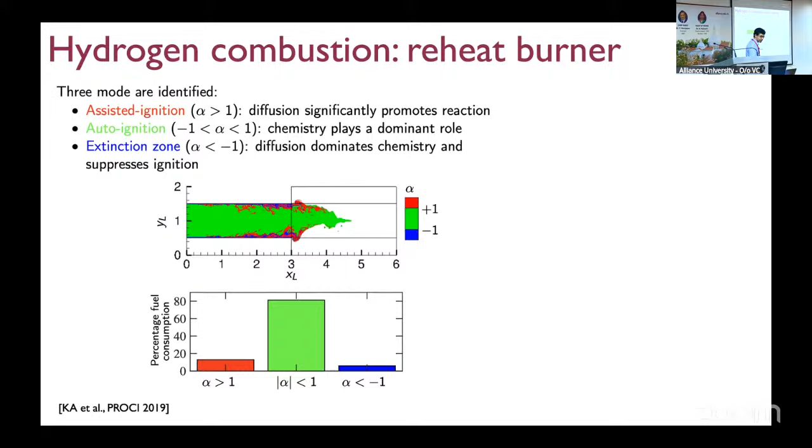In addition, because hydrogen was used, we were able to understand the mechanism for a flame induced instability. Because the flame auto-ignites, it releases a pressure wave in both directions. The pressure wave that goes to the left does PDV work on the reactants and reduces the ignition delay time. This ignition kernel then spontaneously ignites in what is called the mixing duct, which is not desired, and this eventually results in a flashback, which is not desired.

So now the question is, we understood the mechanism based on the flow physics, and the next question is, can we really use machine learning to control this?

Before I mention that, this is the overall schematic of how a typical solver works for combustion modeling. You have governing equations, a solver, initial boundary conditions, a subgrid model, you generate data, post-process it, and understand the fundamental insights.

So now how can machine learning come into this picture? In terms of governing equations, using machine learning, instead of solving for all 9 species, I can now solve for 2 or 3 species which are in the reduced dimensional manifold. I'll show you an example for this.

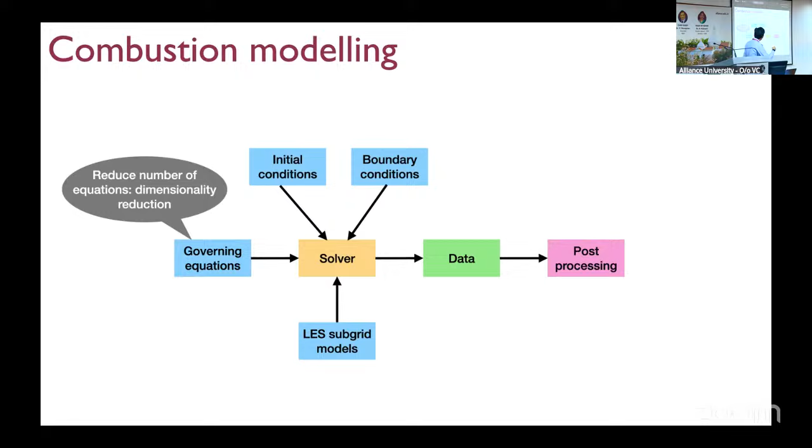Next is in terms of initial conditions: we can use what is called a super resolution algorithm, where we use low fidelity simulations to generate high quality initial conditions for my high fidelity simulations. And then in terms of boundary conditions, for example I want to generate realistic turbulent inflow - generative models are now capable of generating turbulent inflows that maintain both spatial and temporal correlation lengths and time scales.

And finally, in terms of LES, you can use parameter closing using machine learning, where different flow regimes that demand different parameters are automatically adjusted using a machine learning model.

And finally, once you have the data, what can we do? We can do analytics using machine learning to detect extreme events. Any event that you are not anticipating, if it occurs, can we capture its inception? Can we capture its precursors? And finally, create reduced order models for engineering design.

So this is the whole big picture, and these are the set of equations that we solve. Typically these are about 100 equations. When you take a complex fuel, it has about 20 to 500 reactions in a DNS kind of setting.

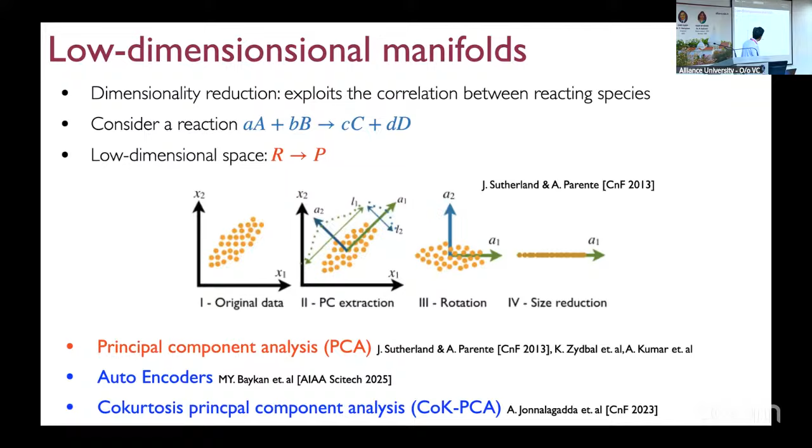So this is the entire dimensionality reduction technique, where the entire process can be envisioned as an autoencoder process. You have your initial condition, you project the data into the low dimensional space. Now you do all your CFD computations in this low dimensional space, and when you have that solution at all the time steps, you project the data onto high dimensional space. In this process, we use autoencoders, neural ODEs, and artificial neural networks for the data reconstruction.

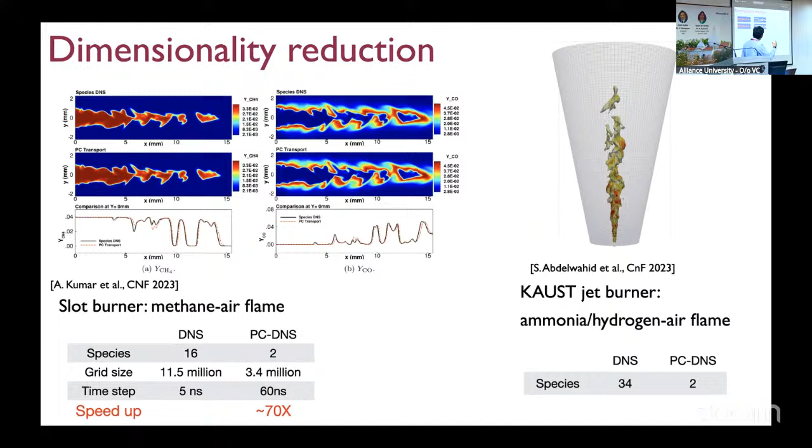And finally, what do we get out of it? Some of our collaborators at KAUST have done this. For example, in this case, a DNS simulation with 11.5 million grid points achieved similar accuracy results with 3.4 million grid points and a much larger time step, which means a speed up of about 70x was achieved in this simulation. So it's 70 times faster when looking at high fidelity simulations. Similar things can also be replicated for other low fidelity simulations.

Finally, the super resolution technique is what typically our phones do. We take our images in very low resolution, poor lighting, and so on. The machine learning algorithm working on our operating system will enhance the quality, and that is what we try to do for flow field simulations and flames as well here.

So recently one of my students has done the first DNS of a hydrogen IC engine, where we look at the propagation of the spark and the flame front. He was able to use this data set and generate the super resolution algorithm, and it works really well. This got published in ECM, and now we are looking for a paper towards Combustion and Flame.

Finally, here in this example, earlier everything was related to simulations. Now we want to look at experiments, how we can help experimentalists get more insights.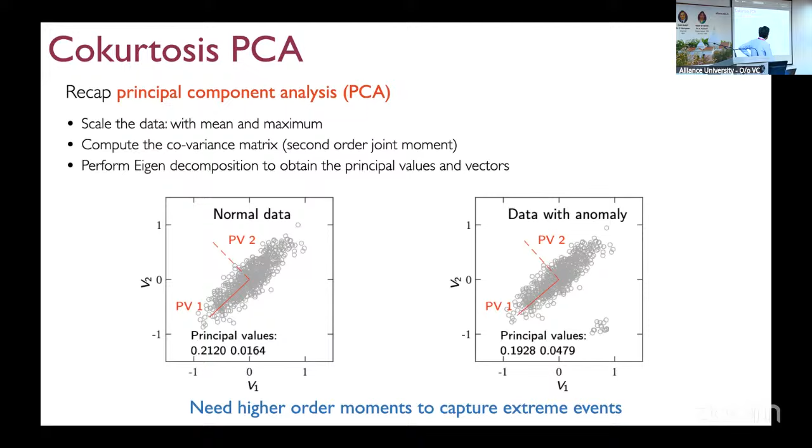However, when we do what is called co-kurtosis PCA that we developed, the first principal vector quickly orients itself to the extreme event. If I change this randomly, it always orients to the extreme event. So this is a technique we developed which helps us understand the precursors for extreme events and helps us quickly detect this.

We implemented this for the flashback case. So now you will see the flashback here. We implemented this in the flashback case, first in the LES data where you have the entire state. Finally, this obviously cannot be used in actual operations.

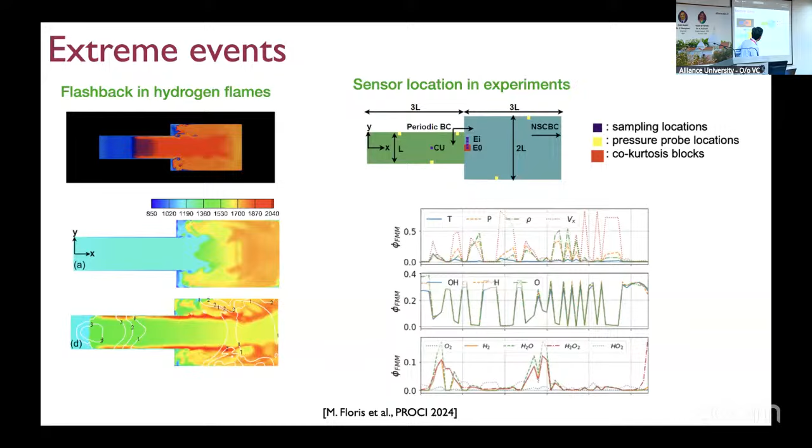So we also developed one more case where we have 5 sensor, pressure sensor data. Now we are using only 5 sensor data in a time streaming manner, and we did the analysis. I will not go into the details, but what I want to show is this is the data for normal operation, this is the inception of the extreme event, and this is the extreme event. In all of these cases, we are able to predict that a priori.

And once we predict that, we inject water and prevent the flashback. So this entire thing was data driven using a machine learning algorithm.

So with this, I want to conclude my talk. The overall message I want to give is machine learning can be used to accelerate and complement some of the traditional analysis being done in combustion science and engineering operations. Broadly, we can use it for feature extraction and things like that. Finally, I want to acknowledge my students and collaborators in getting this volume of work done, and all the funding from different sources. Thank you.

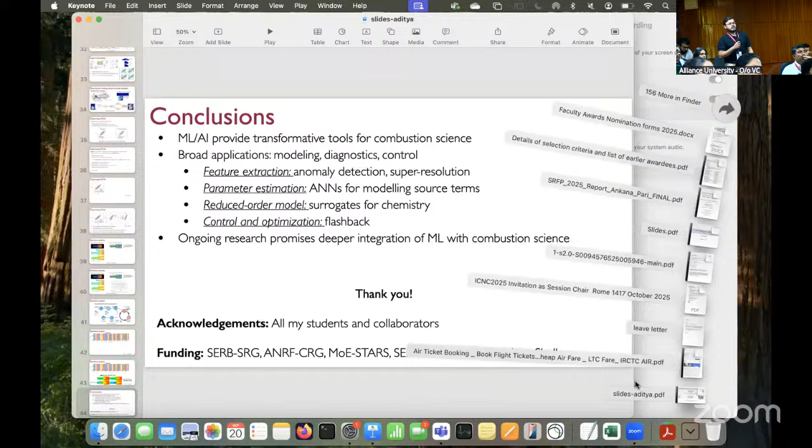Yes. The question is, as you have suggested the ML model for use in the modeling approach, suppose if I have a reaction mechanism of 2000 or 3000 reactions, and in that we also need to consider the abstraction and addition of H and OH atoms, how will this model be able to help in those predictions? There is one more question: how about the stiffness of this solver? If we go for different solvers, it has different stiffness, like if we compare Converge, ANSYS, Chemkin. So can you explain about that?

Most of these commercial solvers do detailed chemical kinetics in some form. What we use are our own custom solvers which do fully resolved chemistry. We go to a time scale of about 5 nanoseconds if required, and 1 nanosecond at high pressure. So what we resolve is much more detailed chemical kinetics than any of the commercial solvers.

Next question is, what is required? It depends on what fidelity you want your results. For engineering macro scale quantities, probably you don't need that fidelity. But once you understand some one-off case and want to understand the fundamental physics of it, then you want to run these high fidelity calculations.

So currently we are developing a framework where you exchange data between DNS, LES, RANS, and a 1D surrogate model with uncertainty quantification and error propagation. We are developing the entire stack of exchanging information across different fidelities, and that will be able to answer your question. One last thing I want to show you here, since you asked about the number of species and reactions, here we use a graph. Okay, so this is not coming up. Anyway, here we have developed a graph neural network based algorithm.

So there is an Aramco mechanism or Curran mechanism that has about 1000 species. Now, if my combustor works in a certain regime of equivalence ratio and temperature, we are able to fully optimize the entire chemistry only for that range and do simulations only with that reduced mechanism. If you use DRG and similar methods, they are more generic and give much larger mechanisms, but with GNN based mechanism reduction that's currently ongoing, we are able to significantly reduce that, very specific to the simulation conditions.

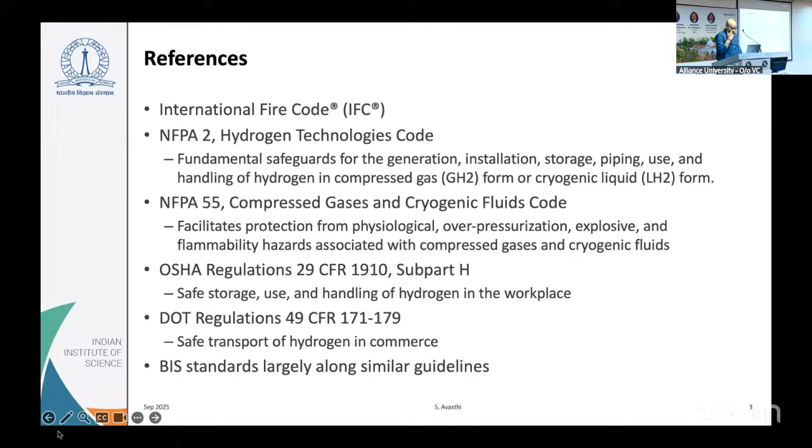The hydrogen hazards are well known. I just quickly searched, and there were more than 4 or 5 accidents that have happened in India in the last 5 years. Whatever I'm going to talk about essentially has been captured fairly well. Hydrogen is one of those very well studied gases. If you look for data, you will find a lot of it. BIS standards, which apply to India, largely follow the codes that are mentioned upstairs. Okay, so let's get to it. We're first going to deal with transport, storage, and infrastructure.

I'll start with this. This is not hydrogen, this is actually nitrogen, but I want to make a point. This is the incident report of a liquid nitrogen cylinder that exploded at Texas A&M University. I'll read it out. The story is there was a cylinder with a safety release valve. The safety release valve went off, and a student decided that wasn't very necessary, so they replaced it with a plug. Then one night, the cylinder exploded. This is what happened. Thankfully, nobody was in the lab, so it's funny, but it still makes the point.

The cylinder was standing at one end of a 20 by 40 feet laboratory on the 2nd floor of the chemistry building. It was on a tile-covered, 4 to 6 inches thick concrete floor, directly over a reinforced concrete beam. The explosion blew all the tiles off the floor for a 5 feet radius around the tank, turning the floor tile into shrapnel that embedded itself in the walls and doors of the lab.

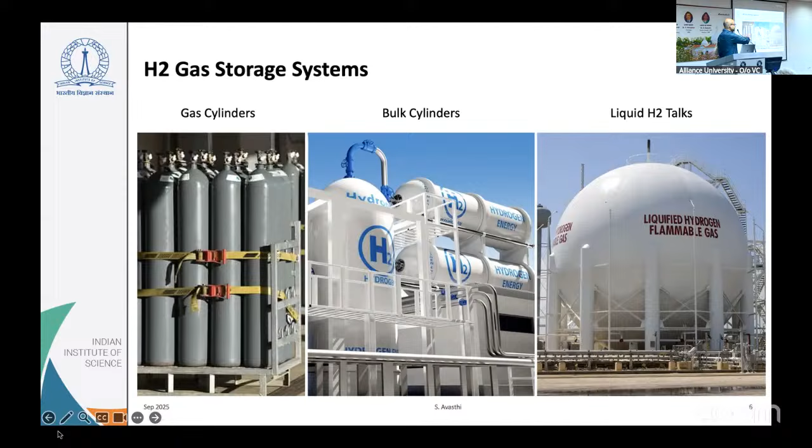So largely there are 3 types of storages. You will have gas cylinders, you will have bulk cylinders, and you will have liquid hydrogen tank. That's, to my knowledge, the largest liquid hydrogen tank, owned by NASA. I'll mostly talk about the first because that's what I understand the best. I'll talk a little bit about the middle, and I'll have 1 or 2 slides on the last.

So first, the general things every cylinder should follow. Make sure the cylinder stays vertical, make sure it has a valve cap, and when you are transporting it, make sure it is strapped. Simple stuff, but if you go on Bangalore roads, you will find that 80% of the time this is not followed.

You're also not supposed to roll the cylinder. It looks very cool, but it's not actually safe. Definitely don't do that for hydrogen. You're always supposed to use carts.

And again, basic hygiene, all cylinders must be labeled. I promise you, you go to any lab in the country, 80% of the time this is not followed. They're supposed to be restrained. Why? Because a fallen cylinder will crack and become a missile. And finally, you should segregate cylinders based on flammability and other considerations.

The reason I'm going through this fast is because this is basic stuff, okay? All of this is needed for hydrogen, and then you need to add the things I'm going to talk about, okay?

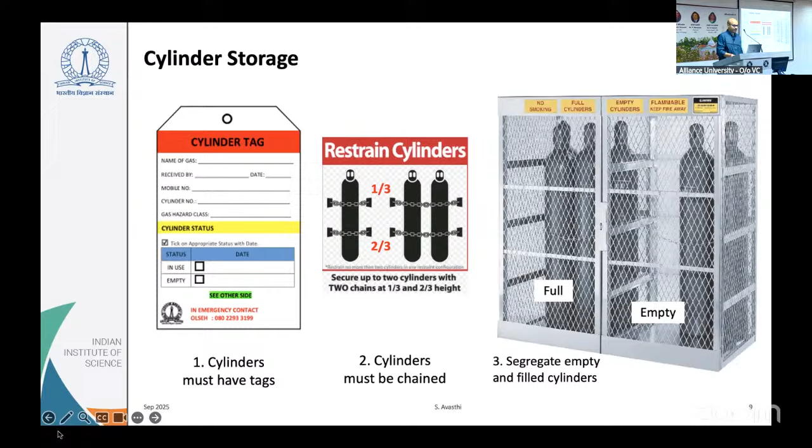Specifically, it will go from 4% all the way to 75%. People instinctively assume that gasoline is very flammable over a very large range, but hydrogen is much more flammable over a much larger range.

Then, related to air, it is much lighter. That has consequences - it sort of diffuses up into corners and is very hard to pump out. If you put an exhaust fan in this room, air will get out, but if there's hydrogen in this room, there's a good chance it will not.

And finally, it takes very little energy to actually create an explosion with hydrogen, in terms of millijoules of energy. A gasoline vapor will start combusting or exploding at around 0.2 millijoule. Hydrogen will do so an order of magnitude lower. To give you context, static electricity, what you get in wintertime when touching a metal door, is 1 millijoule. So a significantly smaller fraction than that is enough to explode a hydrogen cylinder if you let it.

Next bit, which is again something funny unless you see it - hydrogen flame is largely invisible. I have actually talked to somebody who has seen a hydrogen cylinder on fire, and they say the only reason we knew the hydrogen cylinder was on fire is because you touched the outside of the metal container and it was hot. Hydrogen flame can sometimes be completely invisible, especially in daytime.

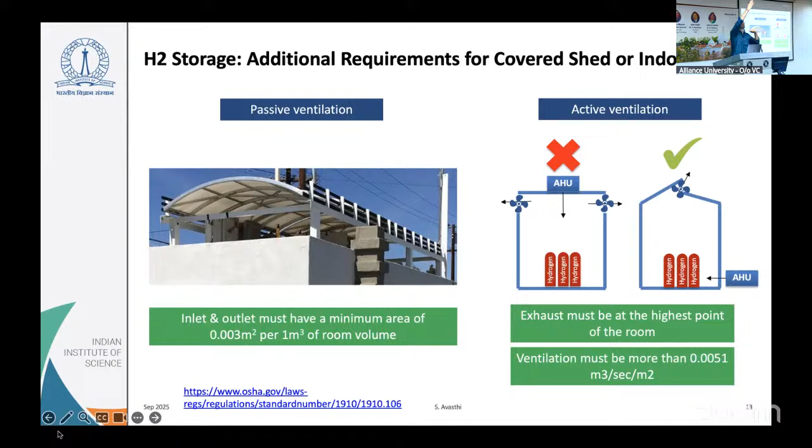Ideally you should never keep cylinders of different types together, but in research sometimes that's required. Even then, there are certain minimum distances required between hydrogen and an oxidizing cylinder, and if you do have them in the same shed, there should be some barrier between them.

At least in our department and much of IISc, we've started that if you're keeping things indoor, you might as well keep them inside a gas cabinet. This isn't required by law or regulations, but it's good practice, because even if the detector detects a hydrogen leak, what can you do? The gas cabinet contains the hazard, so the rest of the area stays safe. Otherwise, once you detect a gas leak, you just evacuate and wait for the hydrogen to dissipate. So a gas cabinet is usually a good idea, especially close to population or in small areas.

Hydrogen embrittlement is a real problem. Many of you from material science and mechanical domains probably know it better than me, but the basic idea is hydrogen permeates into a metal and over time reduces its ductility, and very hard steels tend to crack.

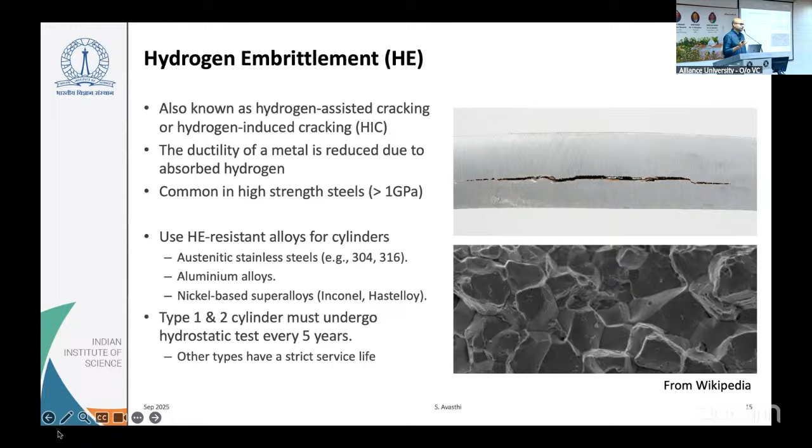Coming back to the piping network, because hydrogen is so light and diffuses so quickly, you typically don't want threaded joints anywhere. The whole piping network is typically completely welded. There are certain compression fittings like Swagelok and Gyrolok rated for hydrogen that you can use, but as much as possible, have completely sealed lines everywhere.

Some places even recommend, like Shell does, using coaxial tubes. Coaxial tubes have an inner steel tube and an outer steel tube, and between those two layers is either vacuum or an inert gas, so if the first tube leaks, the other one will not.

Many of you work on combustion. If there is combustion, you typically want to have flashback arresters. Usually for hydrogen, two are recommended, one near the cylinder and one at the point of use where combustion actually happens.

Because of the very small amount of spark it takes to cause combustion in hydrogen, hydrogen cylinders are usually earthed. This is a very common mistake many people make - they don't earth their cylinders. It should always be earthed. You should ideally have explosion-proof fittings.

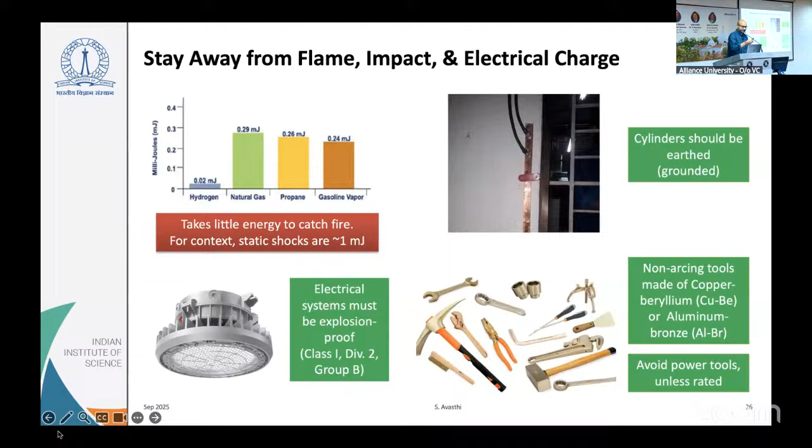Finally, emergency response. Liquid hydrogen is often used whenever you use massive volumes of hydrogen. The good thing with liquid hydrogen is you can store a lot of it. The other good thing is the leak is very visible - if a leak happens, it causes white smoke because water condenses.

It's a very easy and visible way of figuring out there's a leak. But for hydrogen in gas form, you don't have that advantage. So largely, to a first order, flames are invisible. That means infrared detectors are mandatory. In fact, on hydrogen filling stations, you need flame detectors that can detect it.

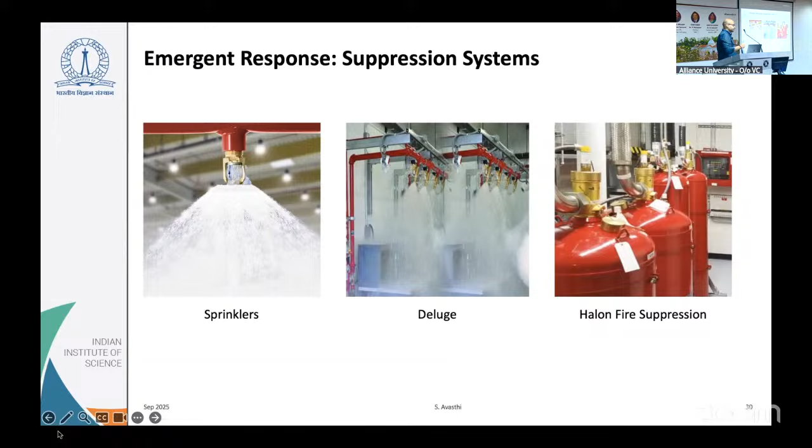Normally there are suppression systems. Sprinklers are the usual ones that are always there. Some people add deluge systems near mass storage and fire suppression systems. I was looking at Ravi's presentation and they have a fire suppression system in their hydrogen setup.

Finally, this is my last slide, one minute. Of course, hydrogen holds a lot of energy - that's why it's interesting. I'll give an example of a 16-cylinder pallet: it essentially has around 2 gigajoules of energy, which translates to around 500 kgs of TNT. That's a very big bomb that can go off.

So ideally, wherever you put your hydrogen, the population should be a little bit away from it. There are calculations you can do. These were originally done for nuclear bomb experiments, because they were exploding things and wanted to figure out the safe distance. It turns out the same mathematics also applies for any explosion event. So you have 2 gigajoules of energy - what is the radius I need before the pressure wave dissipates enough to be safe?

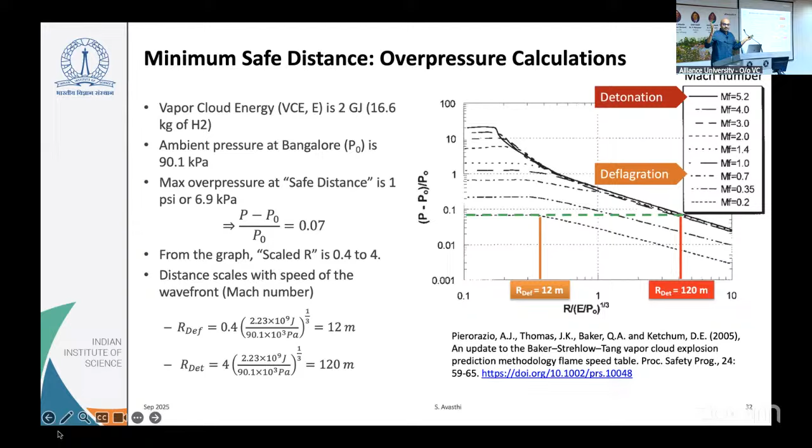Normally 1 psi is considered the standard. If you run the numbers for 2 gigajoules, that distance is either 12 meters or 120 meters depending on how fast the wavefront moves. Because hydrogen tends to explode, the larger one is considered safe - 12 versus 120 is a huge difference. That's why you typically draw circles - if you have a lot of hydrogen in one point, you should house your office buildings that distance away.

All right, that's all I have. Finally, incident reports - hydrogen actually has very good incident reporting systems. If you want to know all the mistakes people have committed, you can go to these links and read them up, because people who cannot learn from history are doomed to repeat it. I will leave you with this series of images, and thank you for your time.